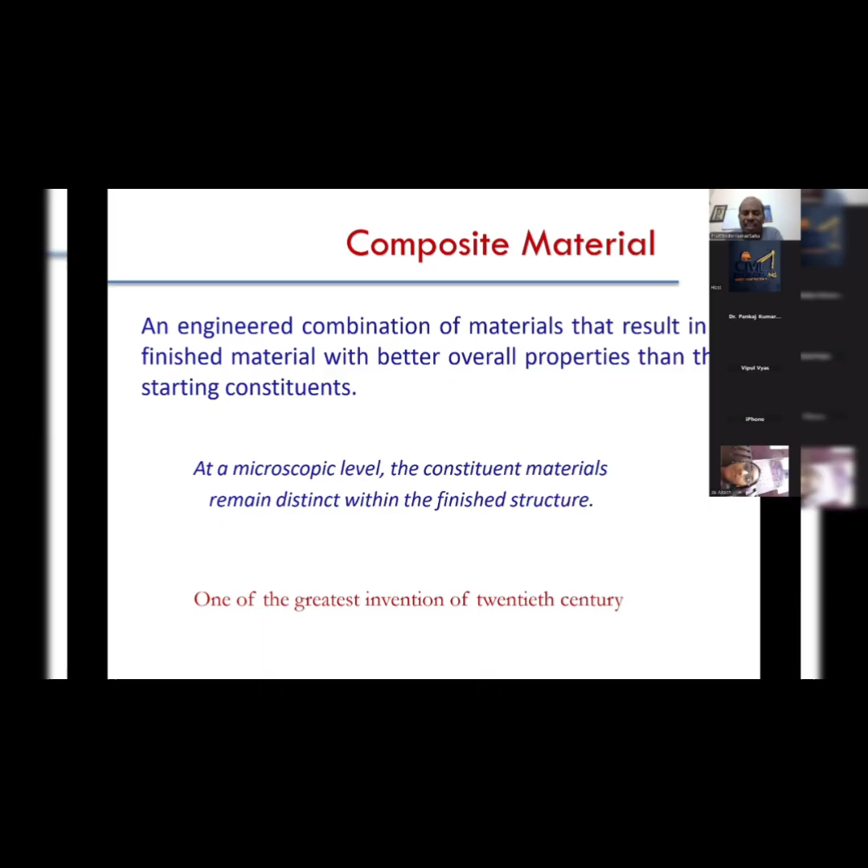In fact, this is one of the greatest inventions of the 20th century. Why am I telling this? The composites were there, but actually the development has taken place recently.

So FRP composites, the history of composite materials started from the Stone Age, where tools and weapons were all made of stone. Then comes natural composites, wood, bamboo. You might have seen wood or bamboo - if you cut it from one direction, cutting is easy, but when cutting in the other direction, it is difficult. This means it has two different strengths in both directions, like a composite. So these are actually composite materials.

There are other composite materials as well - metals, copper, bronze, iron, aluminum, then polymers, ceramics, composites. One commonly used rural material, straw reinforced clay bricks, is also a composite material. Then comes iron for reinforcement of masonry. Reinforced cement concrete is a composite material where the normal cement concrete acts as the matrix and the reinforcement acts as the fiber. In fact, nowadays even fiber reinforcements have come up.

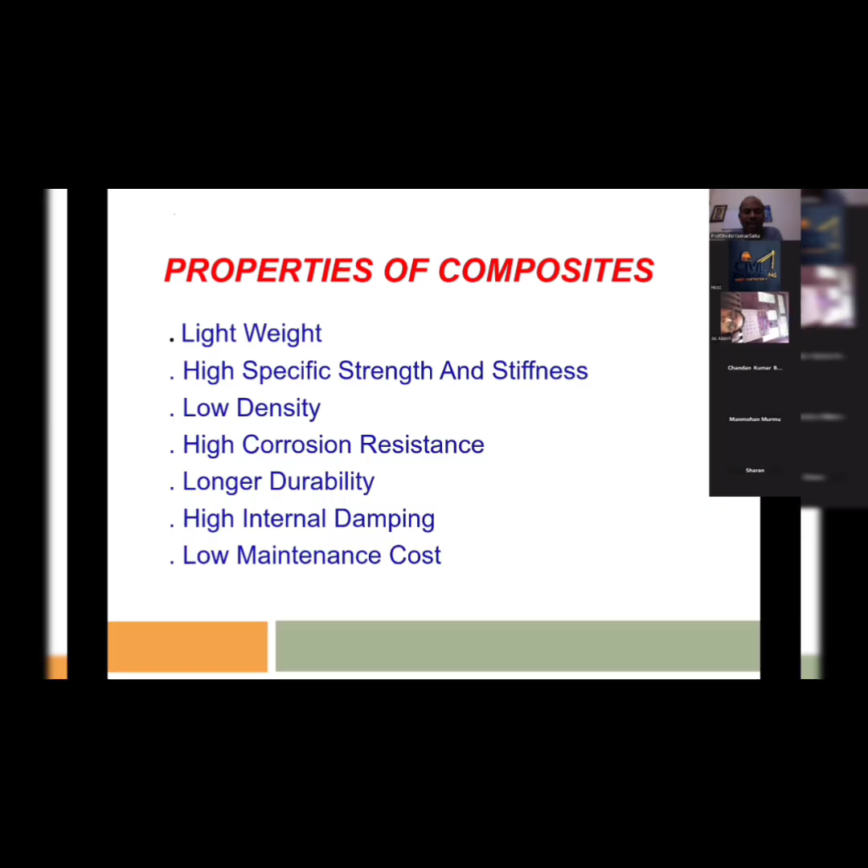Composites have lightweight and high specific strength and stiffness. Specific strength means strength per unit weight—its strength is not high, but specific strength is high. Specific stiffness is high, density is low, corrosion resistance is high, durability is longer, internal damping is high, and maintenance cost is low. These are some of the advantages of composites.

The tensile strength of composites is 100 times greater than that of steel or aluminum. The strength to weight ratio of FRP is 18 times that of steel and 50 times that of concrete. FRP materials are 30 to 40% lighter than aluminum structures.

Besides, most military aircraft are composite actually—aircraft like the F-35, Boeing 787, and Airbus 350 and above. These 350, 380 passenger planes use more than 50% composites in the wings and main body, called the fuselage, and other components, in comparison to Boeing 777 models.

In comparison to Boeing 777, the 787, which recently had an accident, uses a minimum of 50% composite material.

The composite bridge in Oxford, the Avantime passenger car, Kenwood truck, and the award-winning Oracle sailboat are some applications of FRP composites. The F-35 Lightning II, the latest aircraft in the USA, will be the first mass-produced aircraft to integrate structural nano-composites—first composites, then we'll go to nano-composites as well.

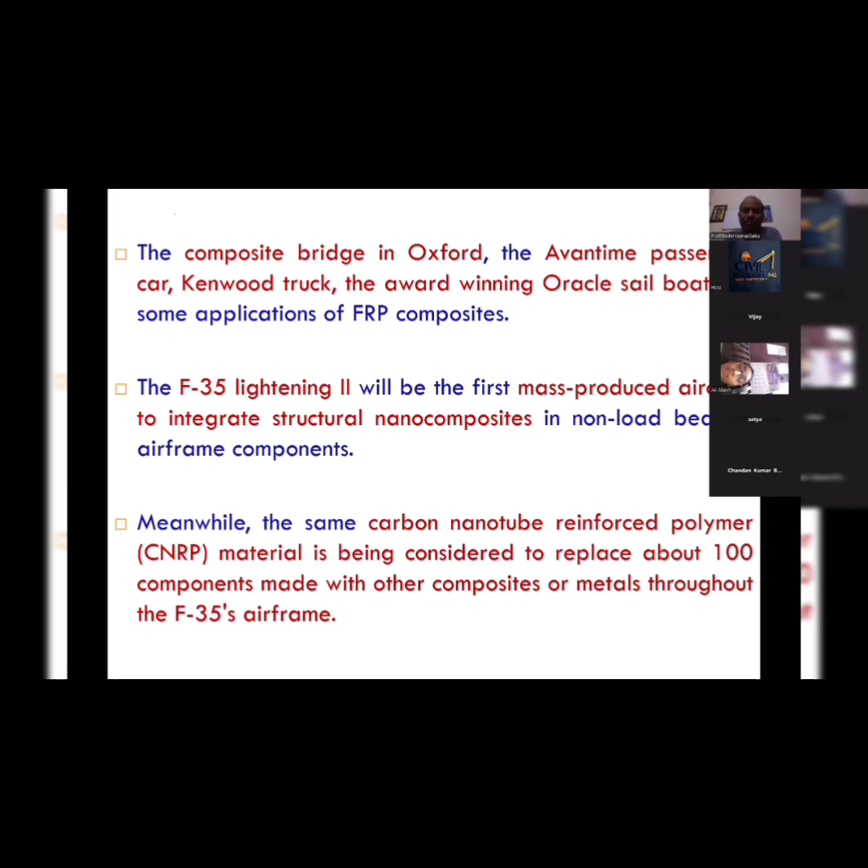Some nanomaterials are put inside the matrix in non-load airframe components. One such nano-composite is the carbon nanotube reinforced material, which is being considered to replace components made with other composites or metals throughout the F-35 airframe, the latest military aircraft.

By comparison, the 777 uses 12% composites and 50% aluminum, while the 787 uses 50% composites. More than 50% composites are being used in the 787 onwards, and in most military aircraft.

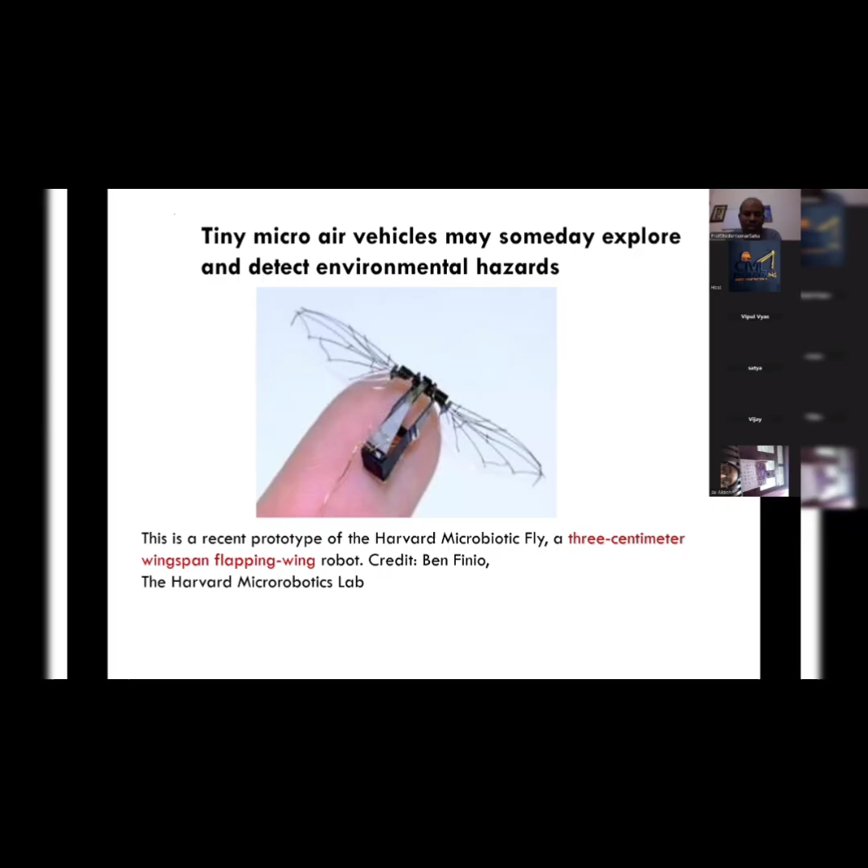Including spying. This is also a teeny micro air vehicle used to detect environmental hazards. This one was developed at Harvard University, a 3 centimeter wingspan flapping wing bot.

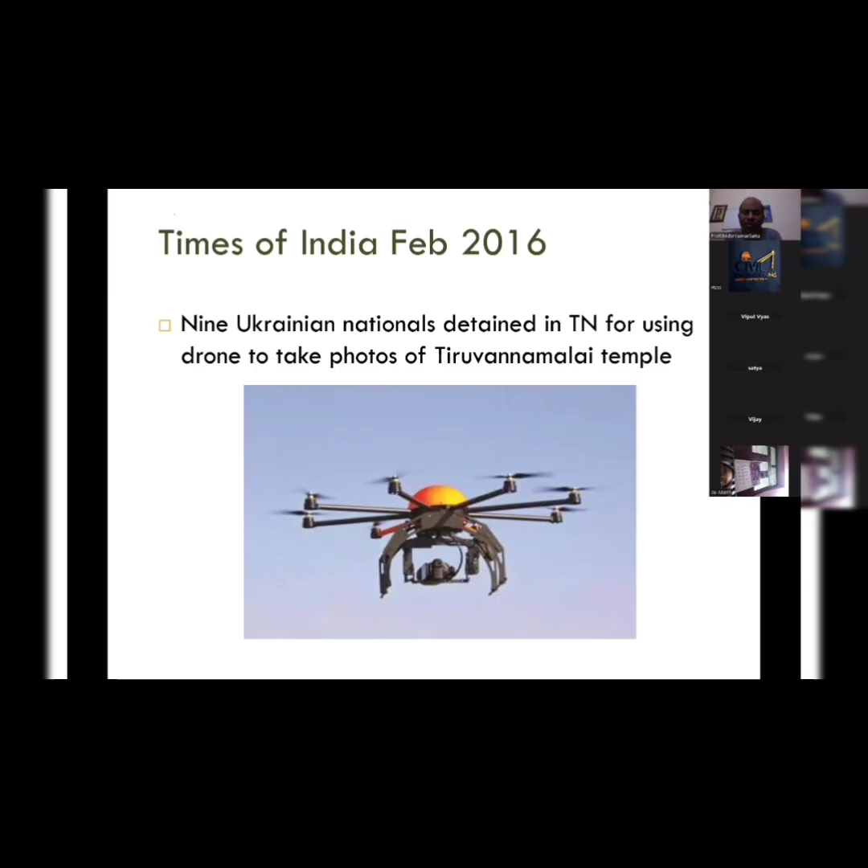These are small drones. Nine Ukraine nationals were detained in Tamil Nadu in 2016 for taking photos of the Tiruvannamalai temple. Now we are seeing a lot even near Jagannath temple. Every fortnight something is coming up with flying drones, and many parts are composite materials. Drones fly at an altitude of 50,000 feet and can monitor the movement of objects as small as a football.

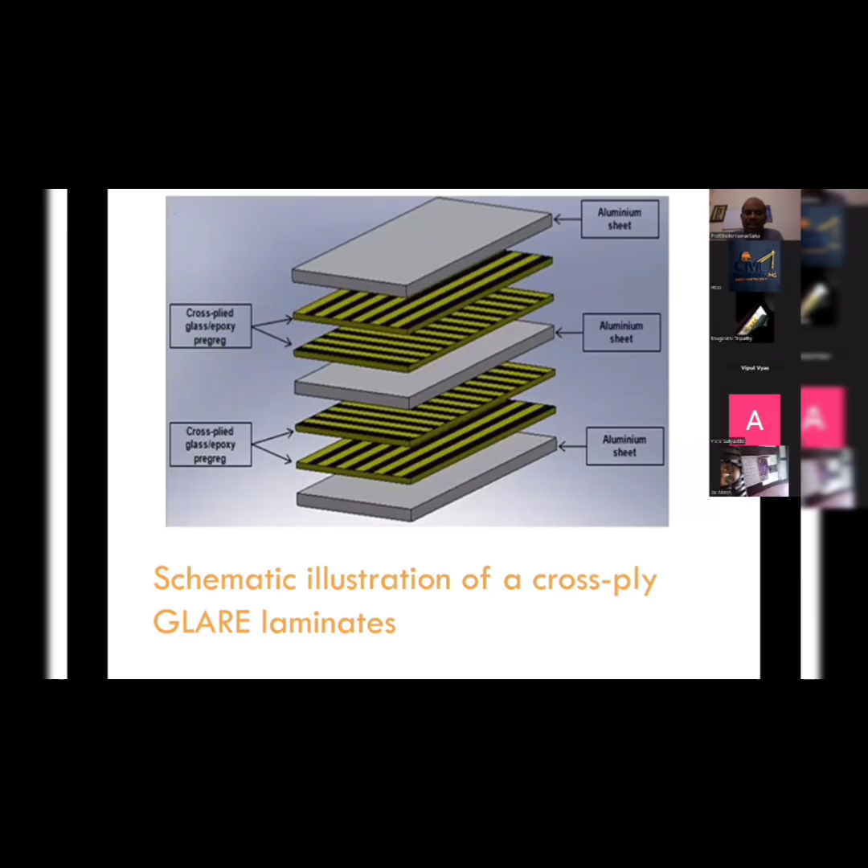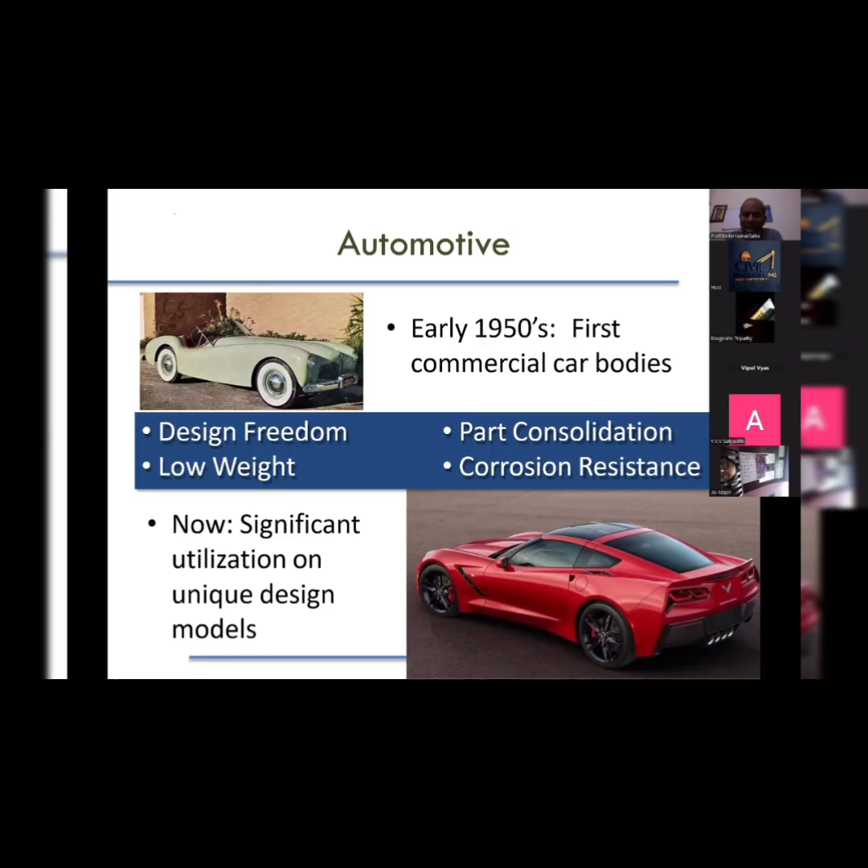So what benefit do we get out of this? You can see a vehicle from the early 1950s, the first commercial car body, and this is one of the latest cars. So we got design freedom, corrosion resistance, low weight, and significant utilization of unique design models can be obtained through innovation by the use of composites.

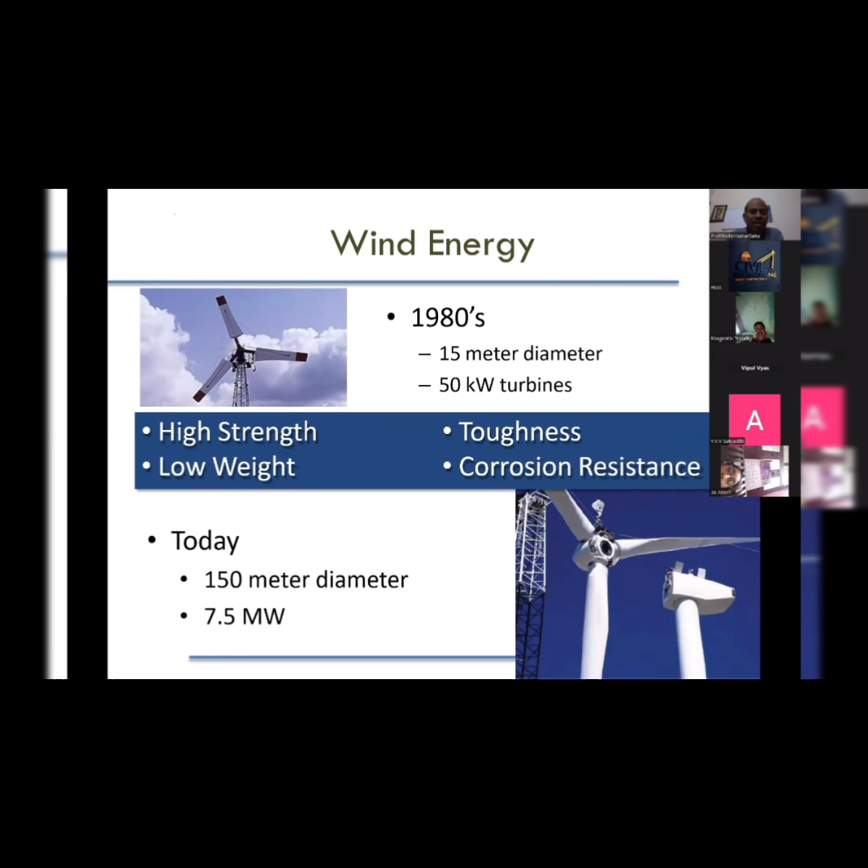This also applies to aerospace. In 1970, the Concorde was 8% composite; now the 787 is 80% composite by volume, 50% by weight.

Besides this, composites are also used for civil engineering member strengthening techniques. We can use it as a composite material directly, or we can use it for strengthening purposes as well. You can see a civil engineering column which had yielded, being wrapped with carbon fiber wrapping to strengthen the column.

We can also give an FRP jacket, or a concrete jacket. These are some of the different methods of column strengthening: you can give a concrete jacket, a steel jacket, or an FRP jacket. The advantage of FRP jackets is that there is no additional load coming onto it, much less load in comparison to a steel jacket or a concrete jacket.

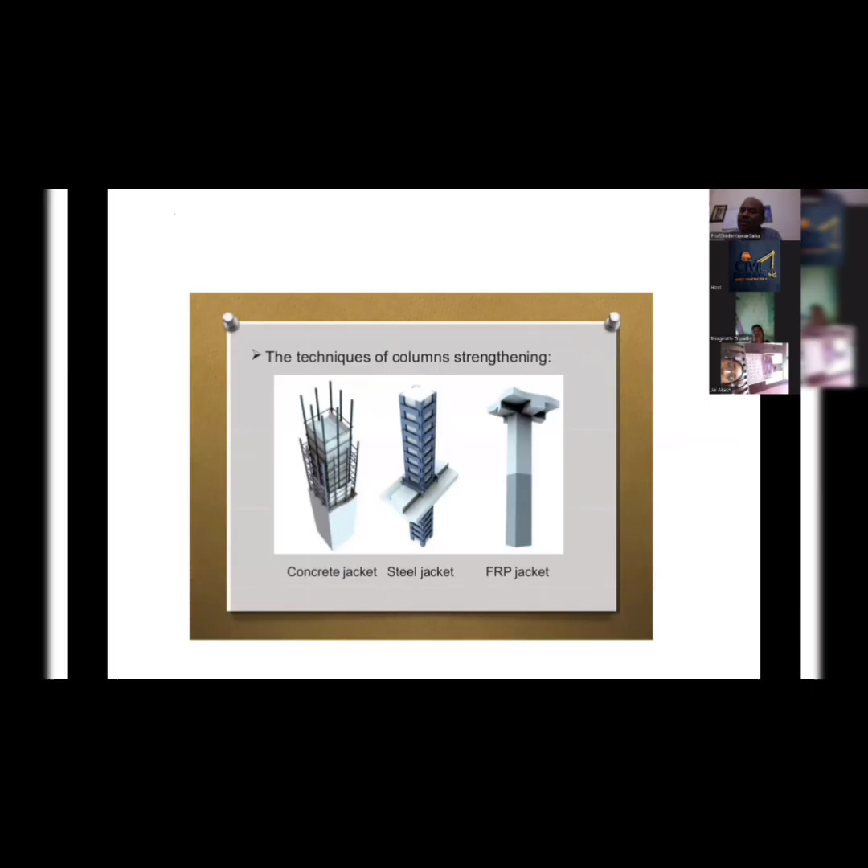So basically the weight of the structure will not change much, with very minimal changes, unlike with concrete and steel. We can also do beam strengthening, with methods like adding an additional layer of new steel, or giving CFRP applications for the same effect.

For bending and for shear. In fact, FRP bars are also coming into the market, just like steel bars FE 415 and FE 500. These are some of the FRP bars: CFRP, GFRP bars, and FRP shear reinforcement.

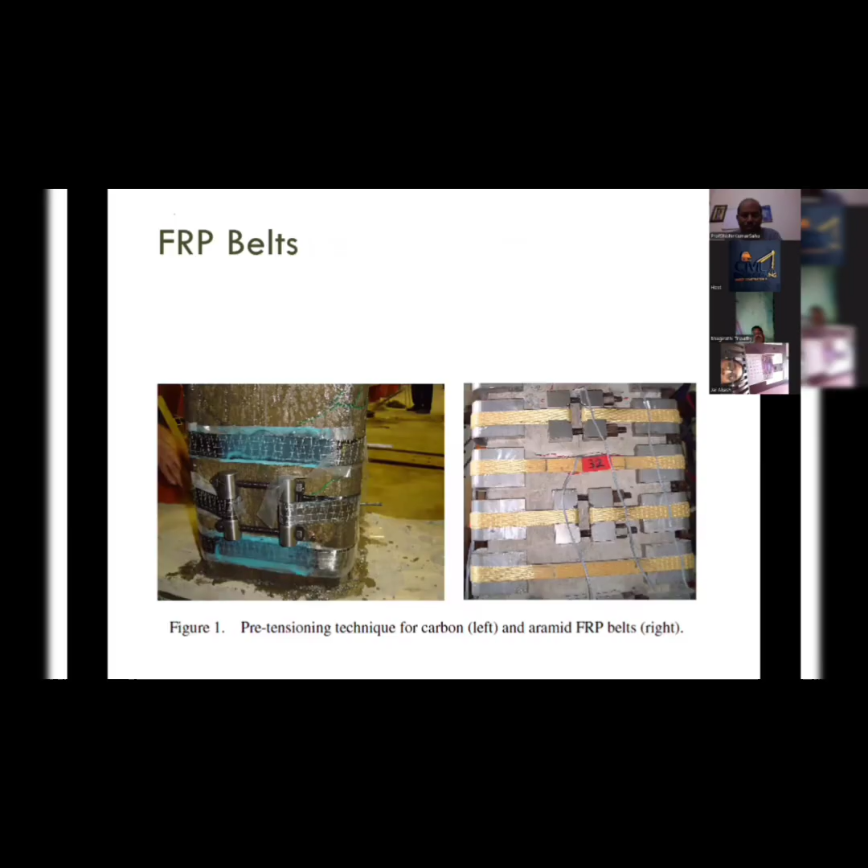FRP belts are being used for strengthening purposes. These are some of the tests we have conducted on beams to strengthen them, using different schemes of FRP - placing at the center, at the bottom, at the top, or using whole wrapping.

These are some uses of composite structures, but today I will focus mostly on composite dynamics. What is the importance of dynamic analysis? Static analysis is done when loads are slowly applied, but when loads are suddenly applied or variable in nature, mass and acceleration effects come into consideration. If a structure is deformed elastically and suddenly released, it vibrates about its equilibrium position.

In fact, when I reached Kharagpur 27 years back for my PhD, I was told to work on vibration. There, I worked in vibration and stability - the same thing I'm working on here, but the difference is what I have done computationally. Over the last 25 years, I've tried to use this for the development of composites and the experimental part. The experimental facility wasn't there in the aerospace department at that time, though some testing facility existed in the mechanical department. Even manufacturing of composites wasn't there in aerospace, and vibration tests were not there either. So all these things I have tried to build over the last 27 years, and I will show you some of what we have developed here - all done in our laboratory.

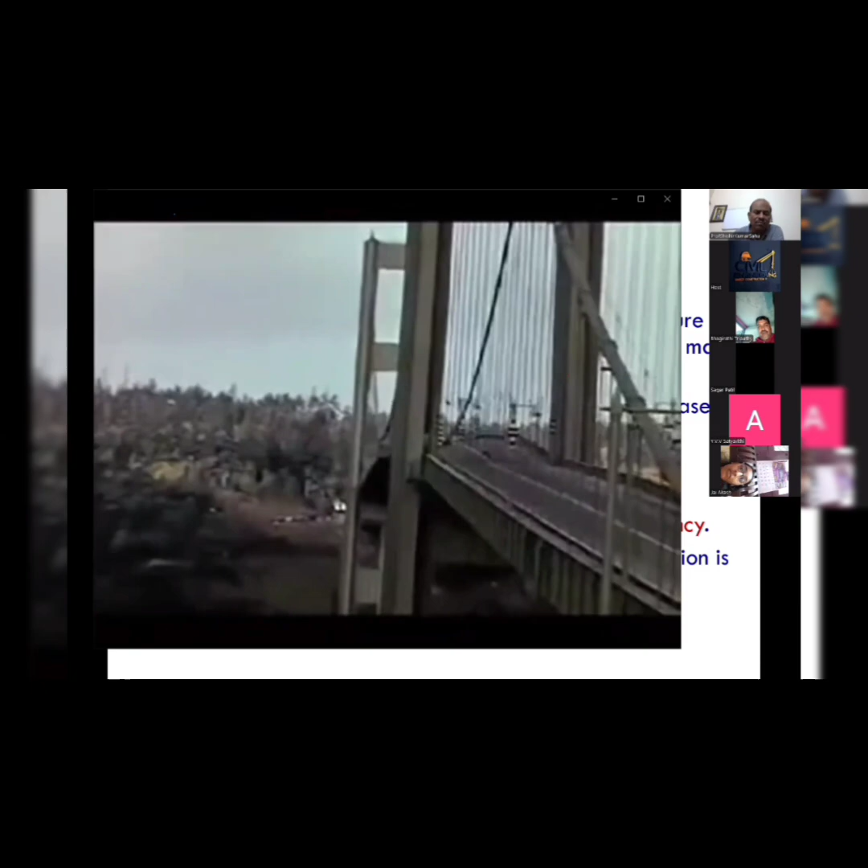Let me show you the importance of vibration. This is a bridge vibrating in the wind. You can see the level of vibration. After a few months, this bridge collapsed. You can see how much vibration can cause havoc.

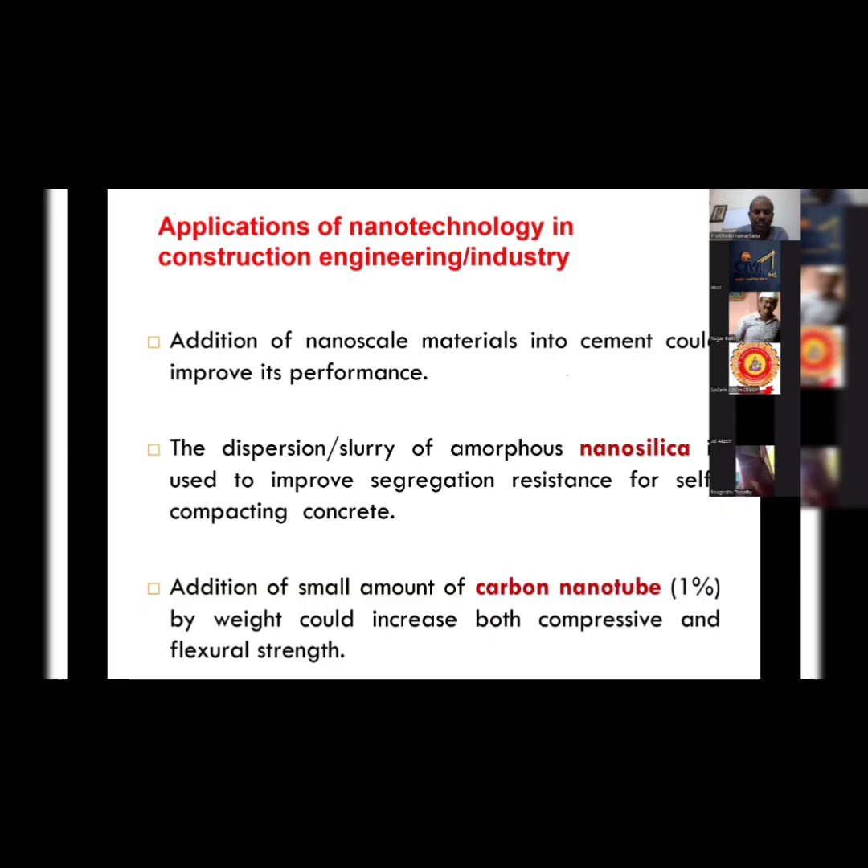So nano and micro electrical mechanical system (MEMS) sensors are used in construction to monitor environmental conditions, materials and structure performance - meaning smart materials. The advantage of these sensors is their dimension, so they could be embedded in the structure during the construction process also.

Smart aggregate, a low-cost piezo ceramic multifunctional device, has been applied to monitor the early age concrete properties such as temperature, relative humidity, and strength development. The sensors are used to monitor corrosion and cracking.

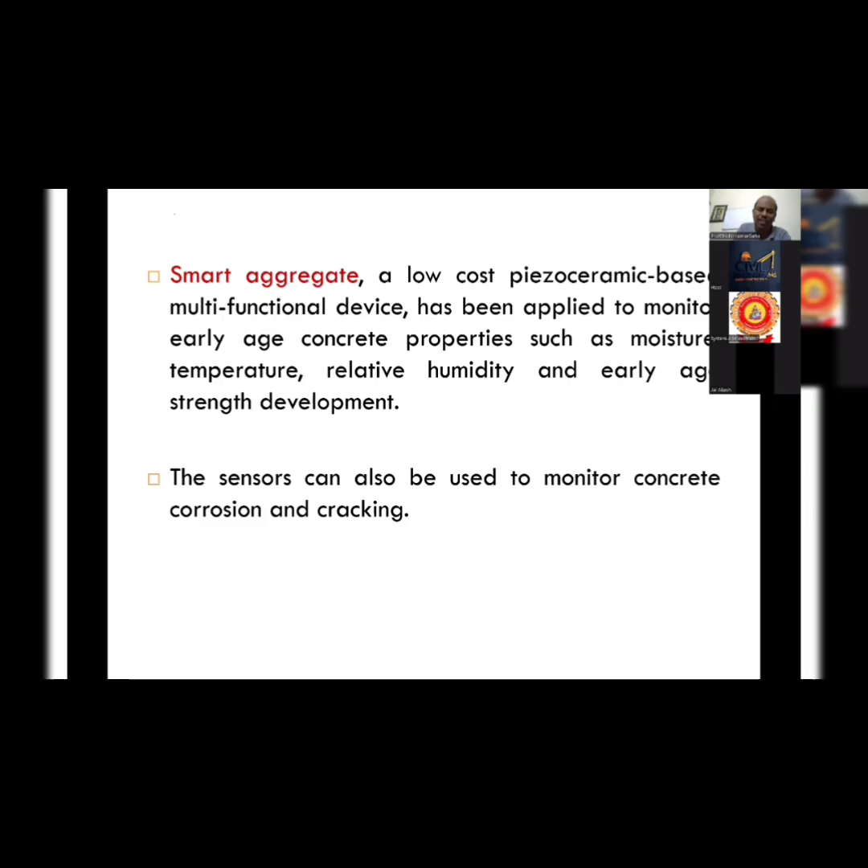Now a lot of discussion is going on about bridge monitoring in the states. The Odisha government is now putting a lot of effort into monitoring of bridges. Because bridges are not easily accessible, less maintenance has been done. One day when it falls down or failure occurs, only then do people become conscious. So sensors can be put so that you can think of when maintenance is required.

One layer might be at 45 degrees, another layer can be minus 45 degrees, another can be 90 degrees, another can be 0 degrees - it can be any degree. This depends upon the force applied - some members are in tension, some in compression, some bending, sometimes torque is acting. So the same configuration may not work; we need to make different configurations based on the requirement.

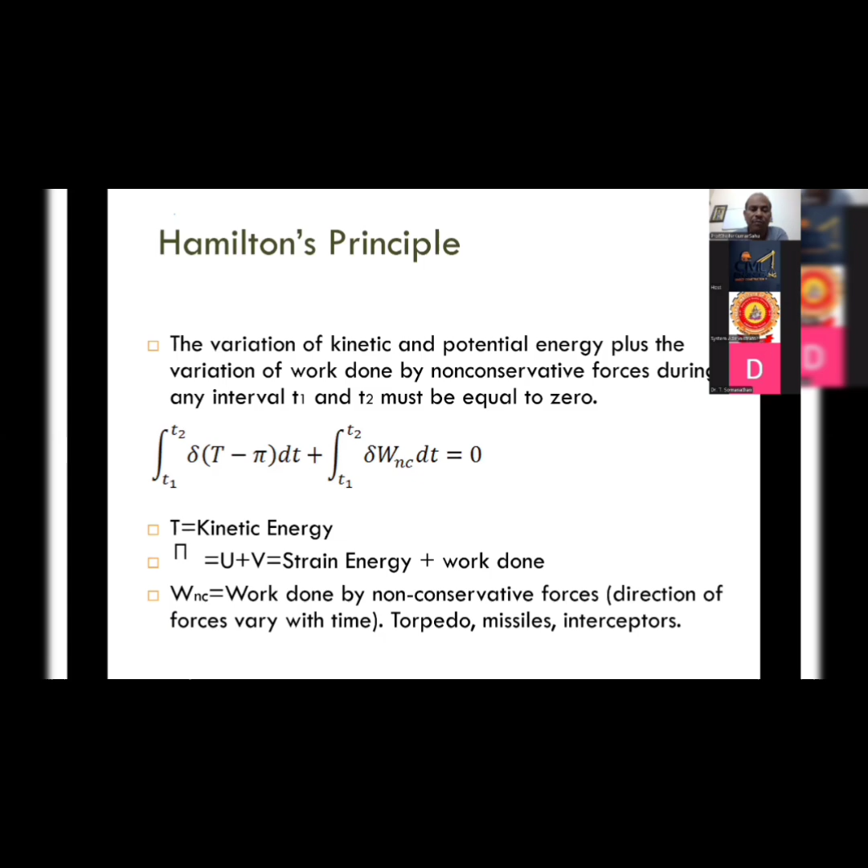When we deal with finite element analysis, mostly finite element analysis has been carried out along with experiments. So this is the Lagrange equation being used for that, where kinetic energy is being considered, and these are the total equations.

M D-double-dot plus C D-dot plus K D is equal to P(T). This is the total equation involving everything. M is the mass matrix, D the displacement, C the damping matrix, K is the stiffness matrix, P is the load. If the load is dynamic, then it's P(T), or else it is just P.

P is the static load. If it is static load, P is equal to K delta. If it is dynamic load, all these things are there. If you ignore damping, C will not be there. So like that, one is there.

Free vibration equation: Ke minus M omega is equal to 0. Buckling problem: Ke minus PCR Kg is equal to 0, or this is called dynamic stability, meaning it is subjected to a dynamic load.

Dynamic load means a building is standing, wind is blowing. Now it is 10 km per hour. During storm, it will be cyclone, it will be 100 km per hour. Every half an hour, the speed is changing. That's dynamic stability. So either the building is standing and the load is coming, or the aircraft is going, the load is changing. Whenever the load changes with time, it's called dynamic load.

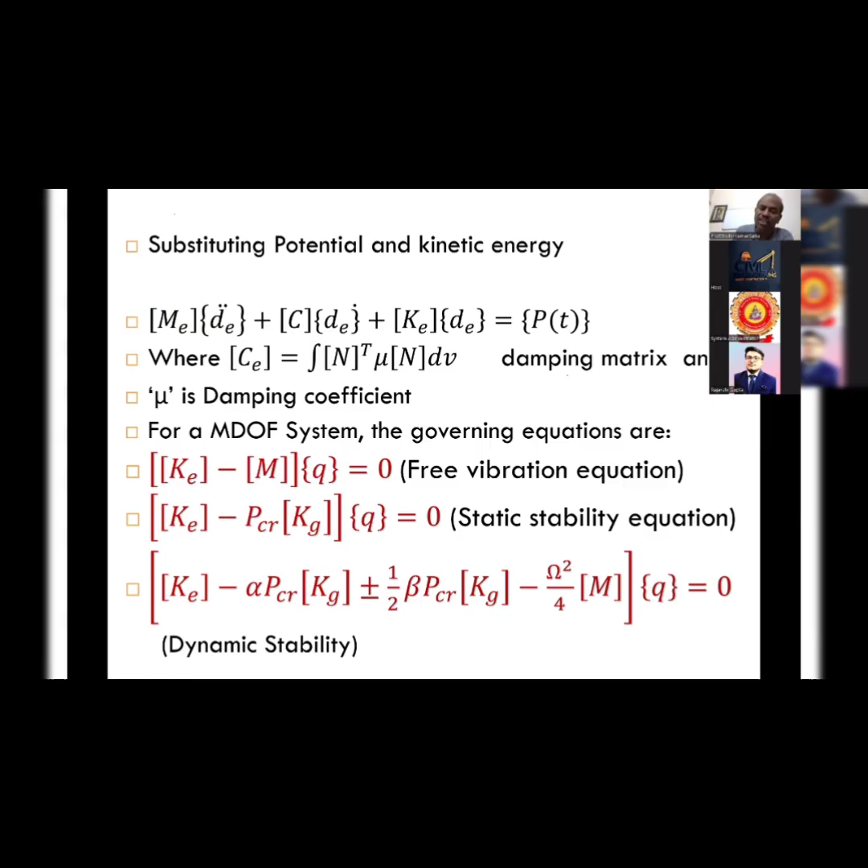In the finite element, we need to take an element. We have taken 4 node, 8 node, 9 node elements - these are the various most common nodes. We have considered an 8 node element with corresponding degrees of freedom U, V, W, theta X, theta Y. U is the horizontal displacement, V is the vertical displacement, W is the bending displacement, theta X and theta Y are the rotations along X and Y directions.

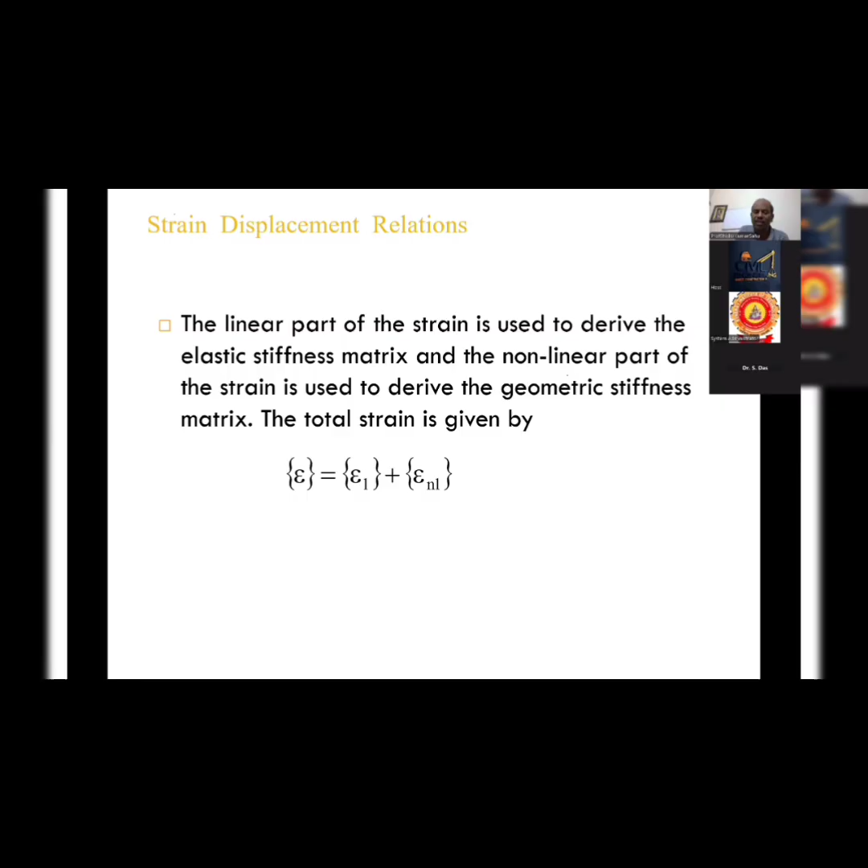This is the strain equation, the strain-displacement relation equation. It can be linear or non-linear, depending on the type of problem being considered. This is the linear displacement equation. Epsilon x is equal to del u by del x, epsilon y is equal to del v by del y, gamma xy is equal to del u by del y plus del v by del x.

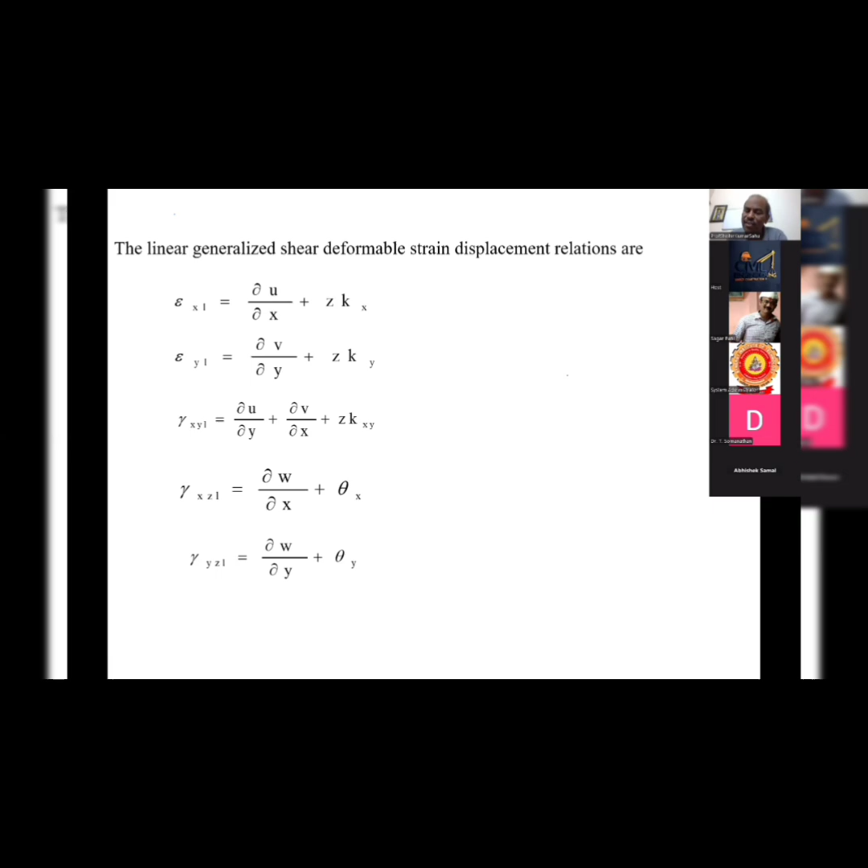In addition to this, the bending components are also included here: Z kappa x, Z kappa y, Z kappa xy. So these are the terms included. The corresponding shear strains are also written, gamma xz and gamma yz. This is valid for a thin plate as well as a thick plate. Composites are usually analyzed using shear deformation theory.

In this way, we can find out the value of the Q's and put it there. This is the stress-strain relationship, where it's called the ABD matrix. In a composite, unlike the isotropic material where it's just a multiple of E and nu, it's more complex.

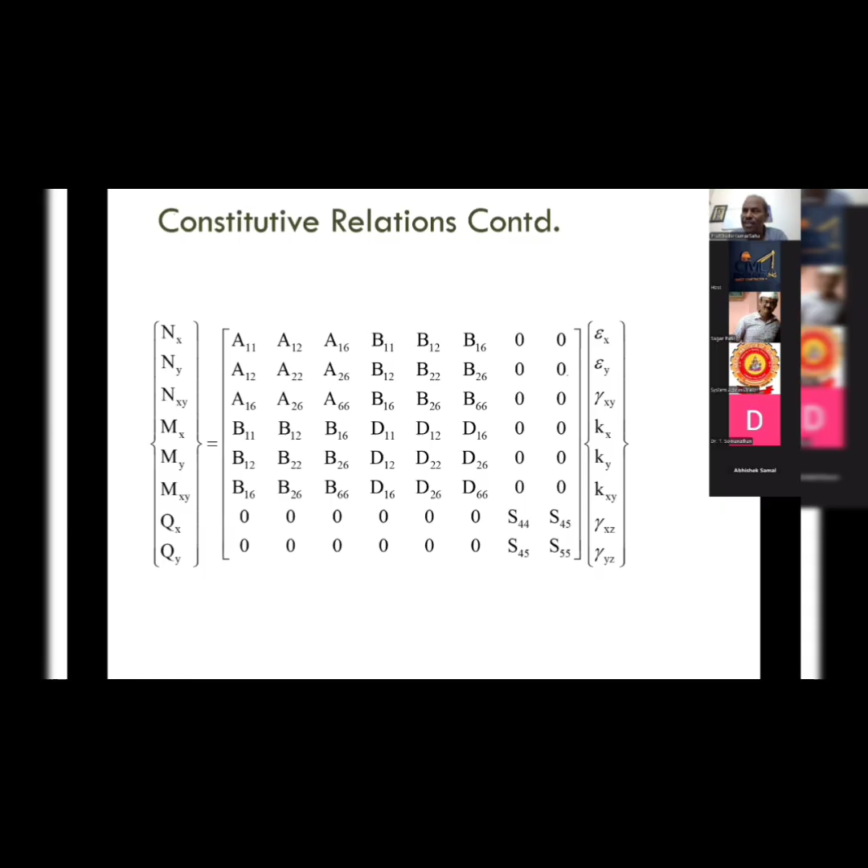Codes are developed in MATLAB environment to compute the free vibration response of industry-driven woven fiber, carbon, glass epoxy composite plates, and double curved shells with area strip delamination exposed to hygrothermal environment. We have done it for plate, for shell, for glass fiber, for carbon fiber, for strip delamination, and for normal temperature as well as hygrothermal temperature. The formulation can handle any geometry, including delamination, material, and general distribution of temperature and moisture. For modeling of delamination, a multi-point constraint algorithm is incorporated in the finite element code.

Then the experimental program - this you can visualize better, how we conduct experiments in our laboratory. So this is glass fiber or carbon fiber - it can be any fiber. We use epoxy and hardener, then polyvinyl alcohol as a releasing agent, and we do the hand layup method.

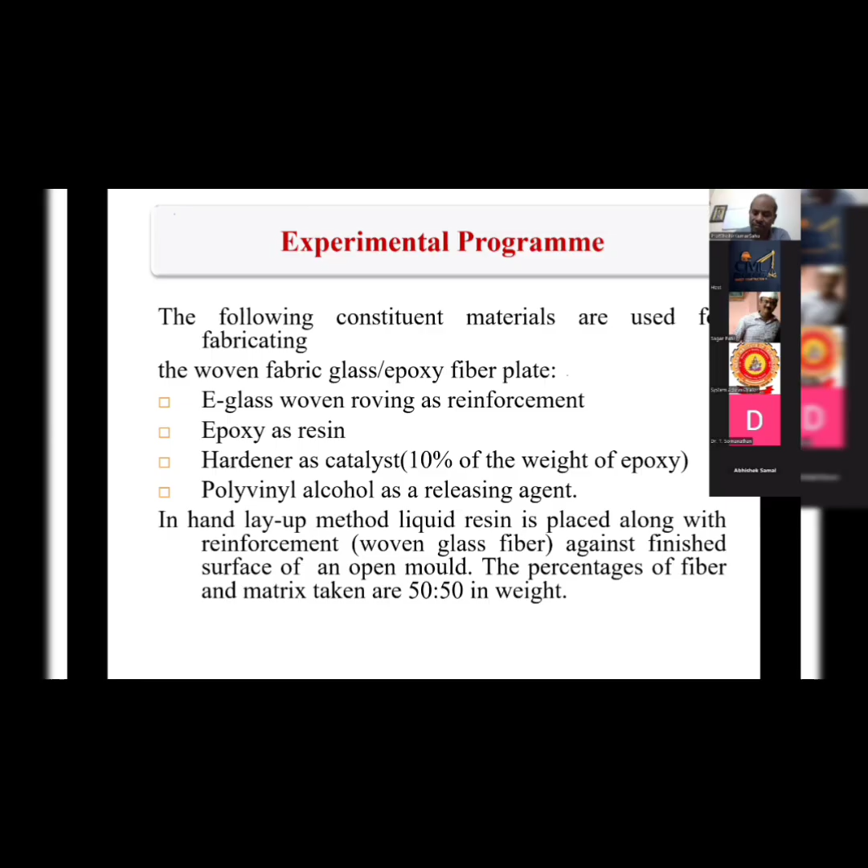This is how it looks like. These are glass fibers. First we put a plastic, then we apply the woven roving glass fiber or carbon fiber, then we put one layer of fiber, then epoxy, one layer of fiber, then epoxy. As many layers as you like, you can do that.

Then we are releasing. The top or bottom one is the releasing sheet. Teflon film is used for delamination purpose. These are Teflon tapes used for artificial delamination in composite.

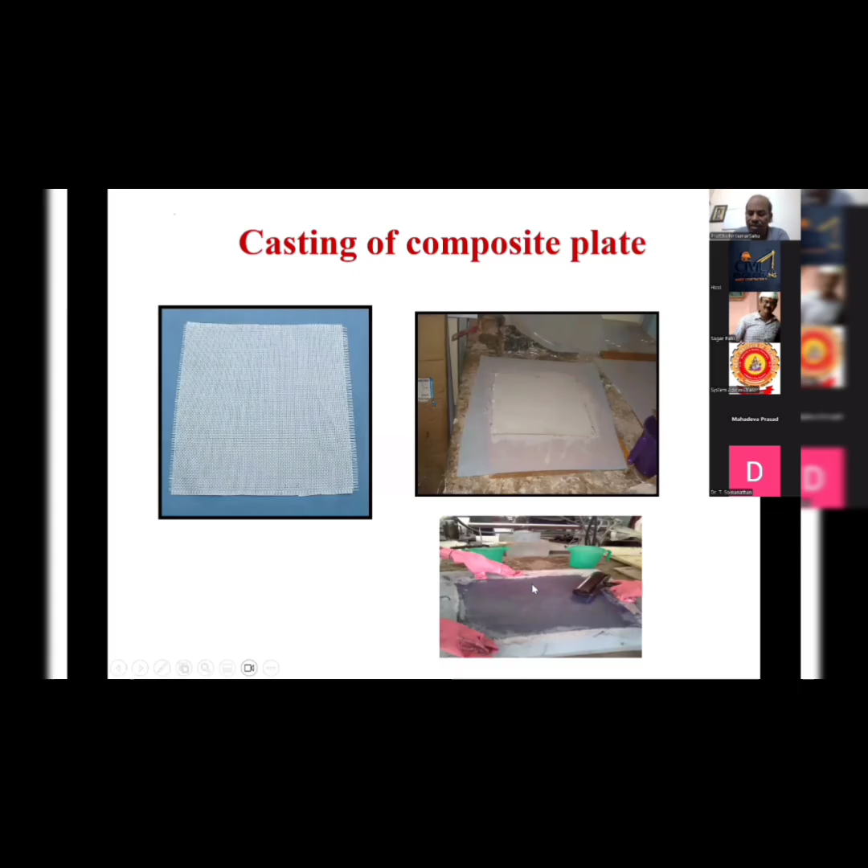These are the plates look like. So this is the plate, this is glass fiber, this is carbon fiber at the bottom. This is artificial delamination, 6.25%, 25%, different percentages of artificial delamination we create with the help of the Teflon tape.

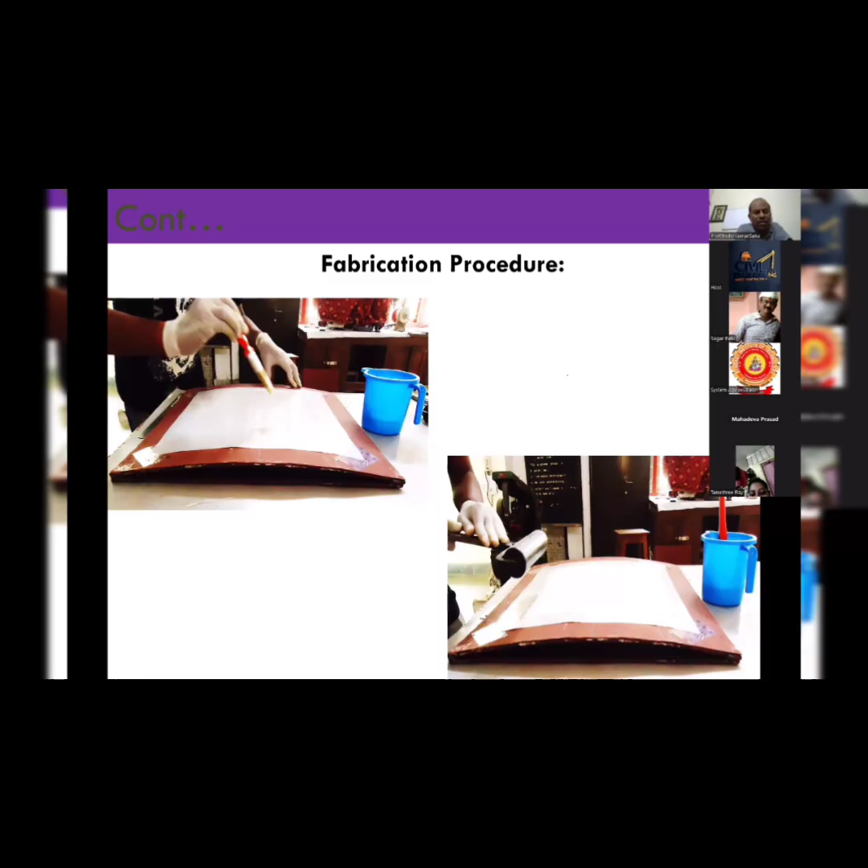Then we have manufactured curved panel specimens. This is how it is being manufactured. So the whole composite fabrication unit is 2,000 rupees. It just needs some consumables and a roller like this, a hand roller.

Initially, I saw it in the metallurgy department. Then in the civil department, we have also started 20 years ago. Casting of fiber metal laminate. Fiber metal laminate is one layer aluminum and fiber, aluminum, fiber - multiple layers can be put into that.

This is CNT, carbon nanotube. These are available in powder form in the market. You can add it to our concrete, you can add it to our matrix here for composite material. So we are working on adding it to our composite matrix and testing for vibration.

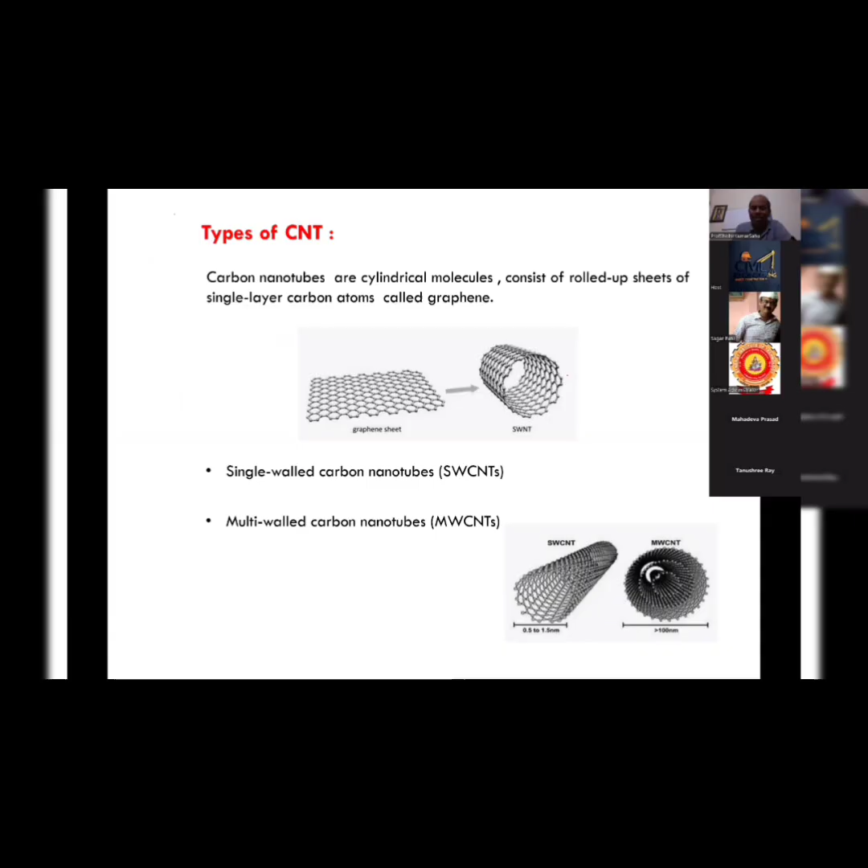Fabrication of CNT reinforced composite material. So this is the first multi-wall CNT. We are using multi-wall CNT plus acetone. Then we do stirring, then sonication is done.

Then it is added with epoxy, preheating, then mixing, then stirring. Then again sonication, goes to vacuum chamber and hardener is added. Then molding is done, composite plate, and then tensile test and vibration sample has been prepared. So right now this test is ongoing.

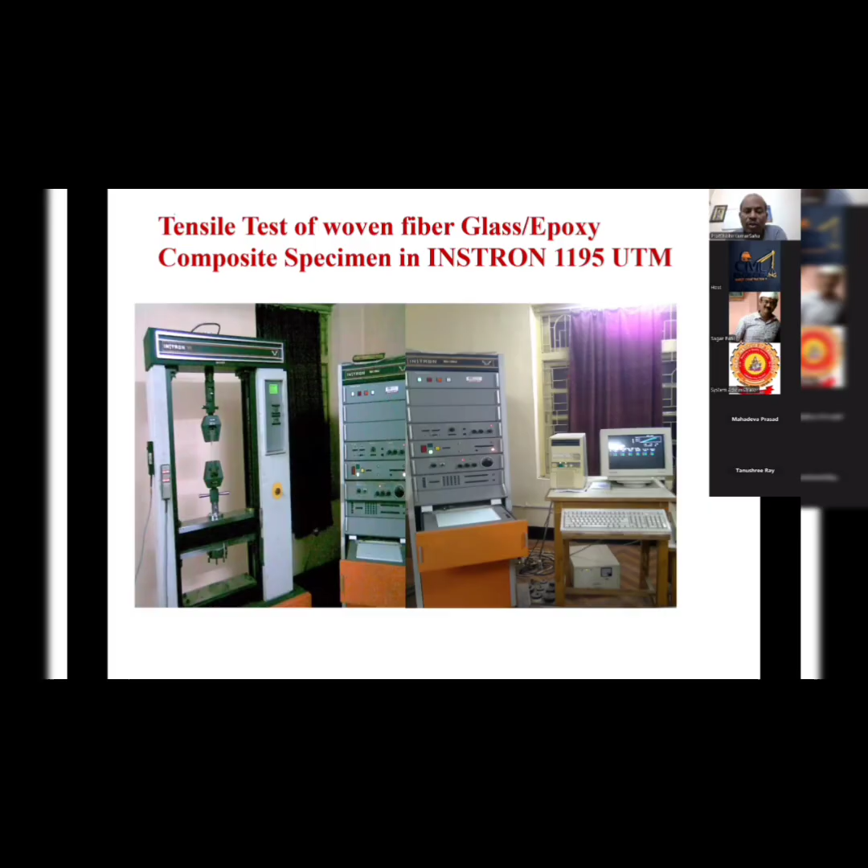What we actually do, once we do the tensile testing, we get the strength of the material, then it is put inside the program, and plate natural frequency we predict from the program, and we test it. The frequency testing is also carried out with the help of an FFT analyzer.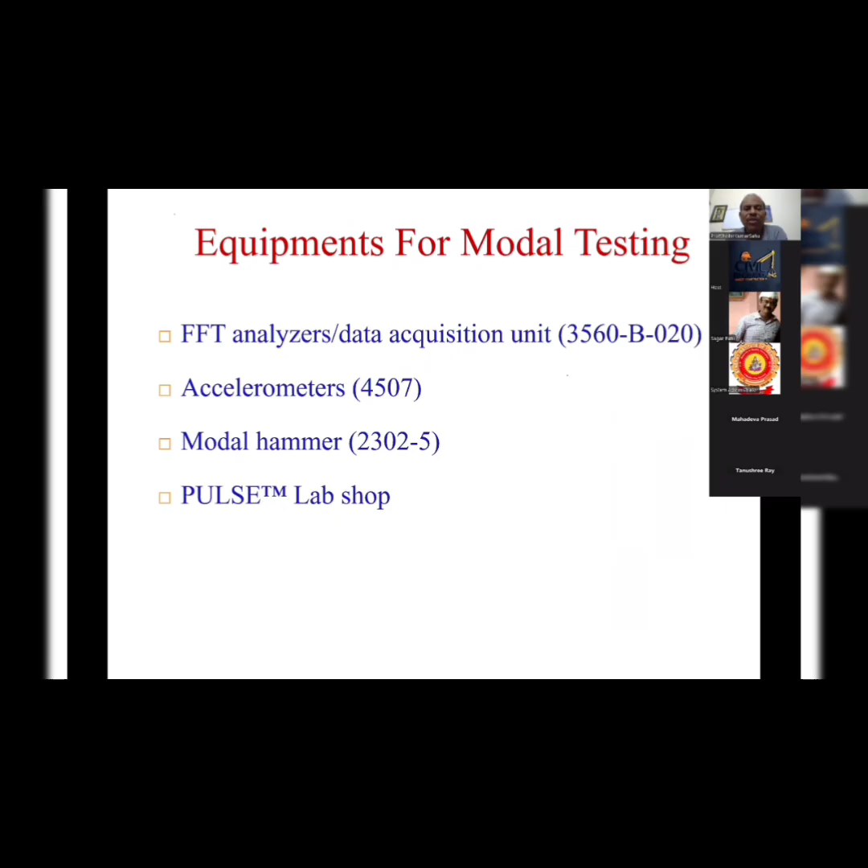These are the tensile testing setup. Then this is the vibration testing. Equipment for modal testing - it's called modal testing. So this is the test setup, this is the vibration test.

So in fact, this is the data acquisition system. This is called the impact hammer. It's a normal hammer, but it's called impact hammer because it's connected with the machine, so the software shows how much load you are giving, it will be measured. We give load to the plate specimens through this impact hammer, the plate will vibrate, and it will be collected through an accelerometer to this data acquisition system.

This data acquisition system is again connected with the laptop. Here the software is there, and the software detects the signal from time domain to frequency domain, from which we get the frequency. So this is the display unit. This whole setup is called the FFT analyzer, used for the vibration test.

This is the modal hammer. This is from a company called Bruel and Kjaer.

Then this is the hygrothermal chamber, this is the temperature bath. We put it at multiple temperatures, 100 degree, 200 degree, 300 degree, 400 degree. Similarly, humidity 0.25%, 0.5%, 0.75%, 1%. So multiple humidity percentages we have applied, and we try to show what is the effect on its natural frequency.

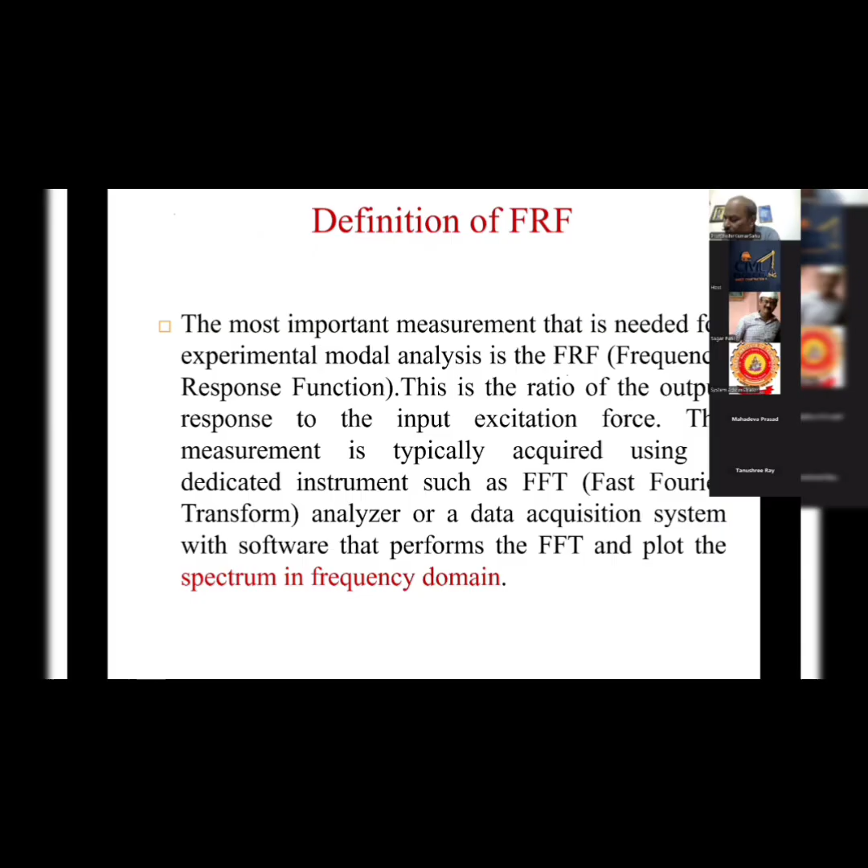Then, what is FRF? FRF is the frequency response function. It is actually when we measure the natural frequency, it shows a frequency response function. So you can see it, how it looks like.

A value close to 1 means it is a very good reading, meaning during the experiment it's giving good data. So if coherence is not good, we reject the reading there itself and repeat the test.

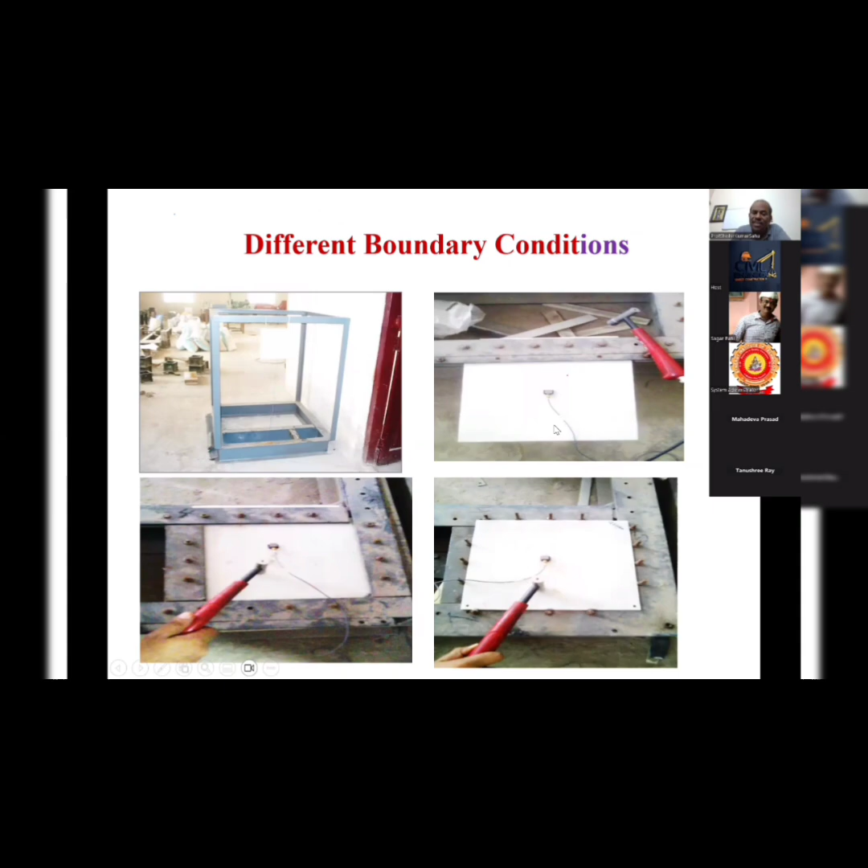This is the free boundary condition, this is another, and this is another important one. Free means the program matches more closely to the free boundary condition. When you give a free boundary condition it matches best, because for every boundary condition there remains some error, but free has the least error.

Now coming to some of the results, free vibration results. First we'll do the convergence study.

Then comparison with previous studies. We compared our finite element results, then our study with experiments. We compared the convergence study, then our results with the previously published results of Crawly, the experimental results of Chakraborty, and the finite element results of Ju et al. Multiple authors' results were compared with ours.

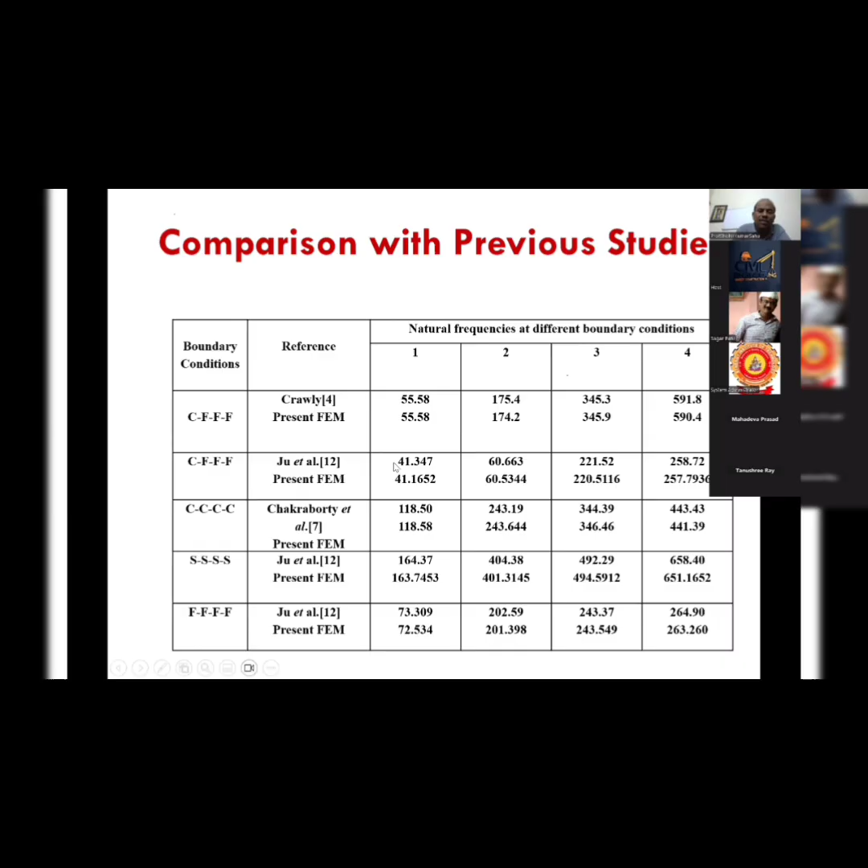Similarly for aspect ratio, which means length by breadth of the plate. For a square plate it is 1, otherwise it can be 0.5, and as you increase the length relative to breadth it becomes 1.5, 2, and so on.

This shows the first, second, third, fourth frequency for experiment and numerical analysis. As you can see, with increase of aspect ratio the frequency increases in this case, but decreases for the first frequency. So these kinds of variations have to be studied for each composite.

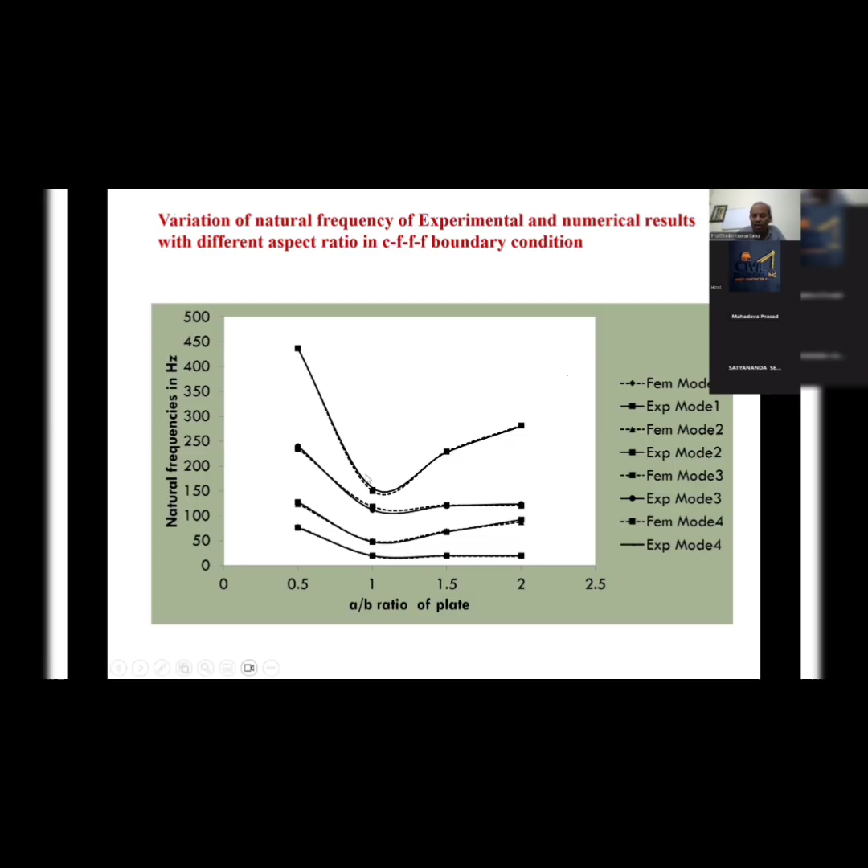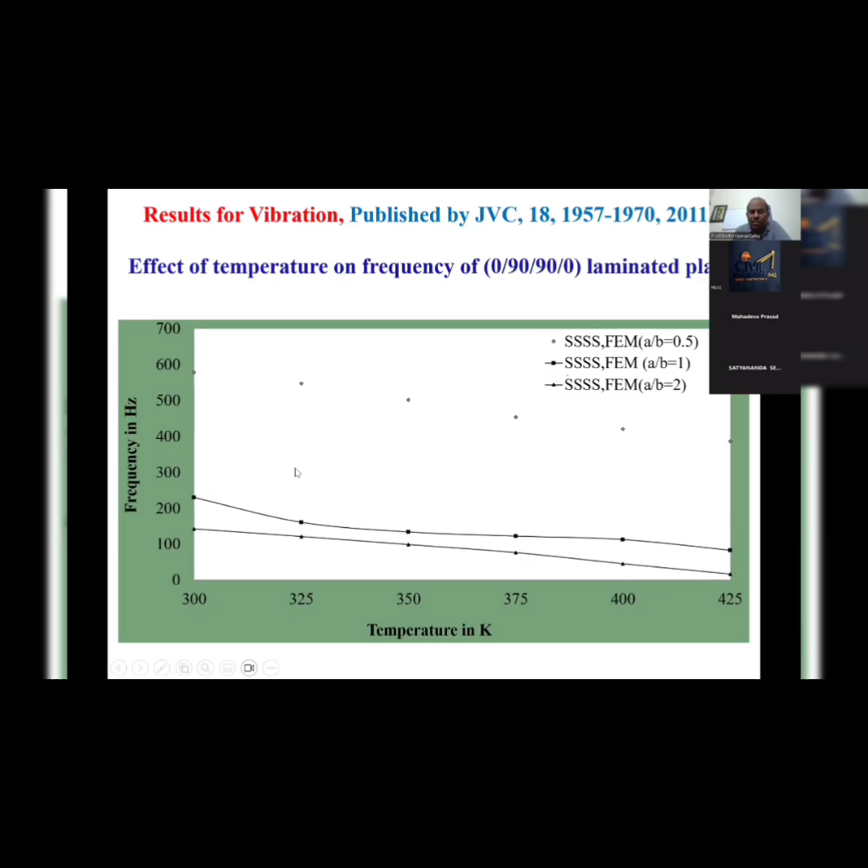Then effect of temperature: as temperature increases, the frequency decreases. This is measured in Kelvin, starting from 300 Kelvin which is normal temperature, then increased by 25, 50, 75, 100, 125. As you can see, the frequency decreases with increase of temperature.

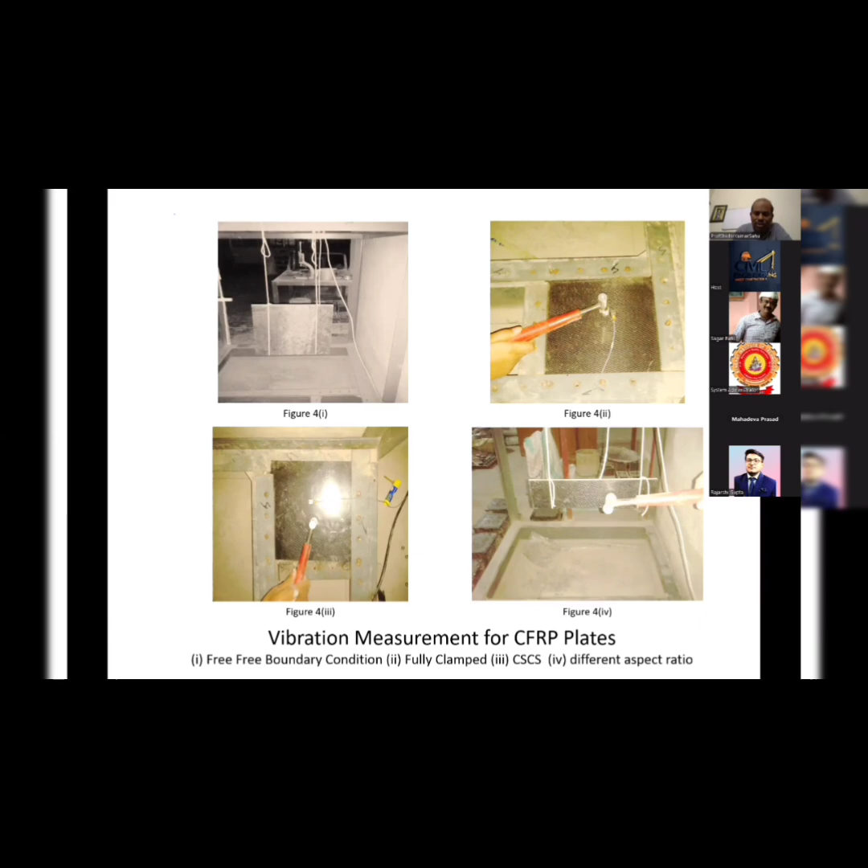The white one looks like glass fiber, and the black one looks like carbon fiber. This is all done with carbon fiber as well. Carbon fibers are costly but real. Our civil engineering applications like roof and wall panels are mostly done with glass fiber, but military aircrafts are done with carbon fibers. A glass fiber sheet of 1 square meter comes around 1,000 to 1,500 rupees, but carbon fiber comes around 5,000-6,000. So carbon fibers are costly, so we have done fewer experiments with it, but we have done it.

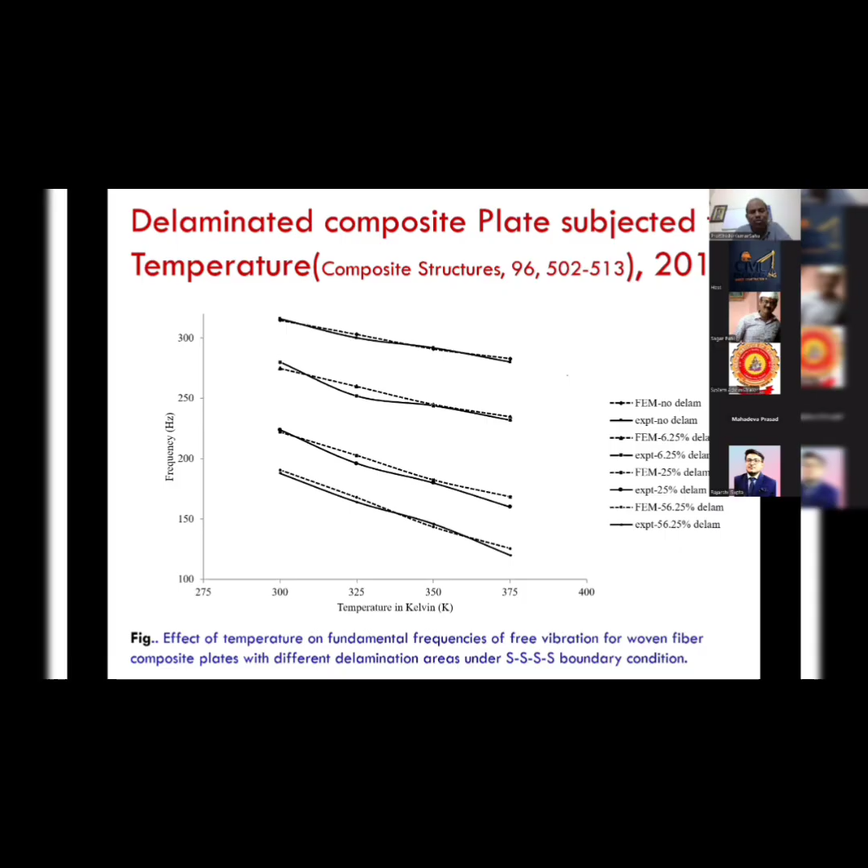Delaminated composite plate subjected to temperature, delamination and temperature both are there. Initially I showed you the effect of temperature. This is a delaminated composite plate with temperature.

This is a plate versus a shell. So this is the plate. Then the FEM and experiment.

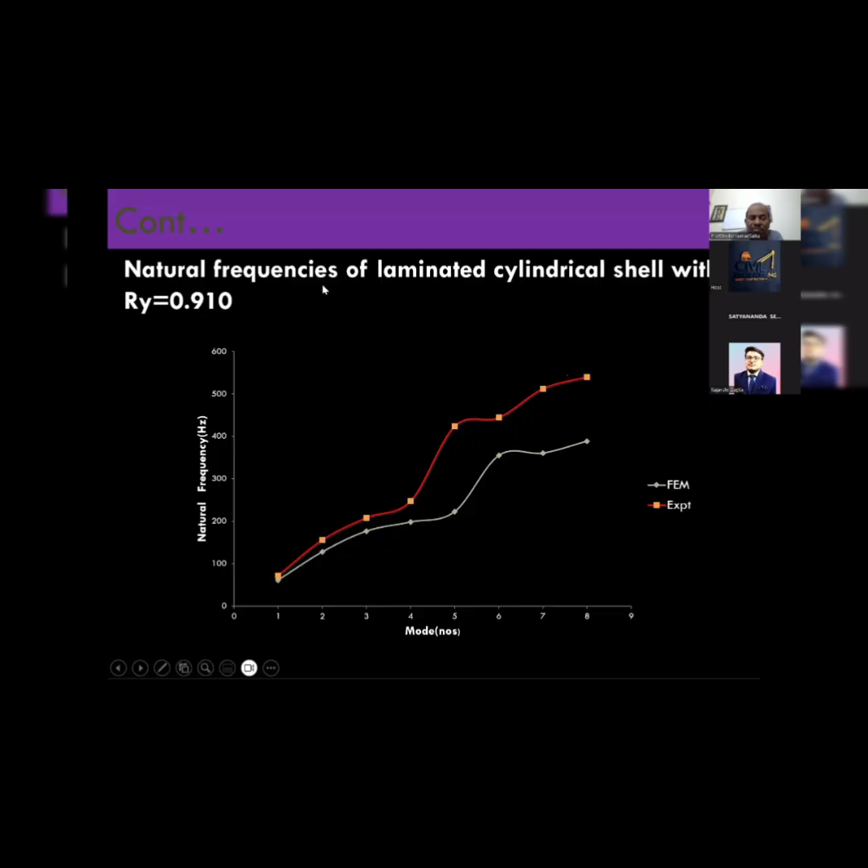Next, compared with a plate - that is the plate - and this is a shell of different curvature. Here I am showing a curvature Ry equal to 0.91. In fact, we have done fabrication for manufacturing of shell specimens. As Ry changes, you can see how the frequency increases.

And these are all mode shapes of shells. You must be knowing there are multiple modes in a structure. When a structure vibrates, there are multiple modes. So this is 1-1, this is 1-2, this is 2-1, this is 2-2. If you take a thin rod and hit it, it will go up and down, up and down. Sometimes one part of it is at the top, the other part is at the bottom, that way. So this is 1-1, just like a deformation shape, but this is 2-1, this is 1-2, and this is 2-2. So the shape of the plate becomes this kind of shape during vibration.

So these are mode shapes at 300 Kelvin, meaning normal temperature. We are trying to show what is the change of mode shapes with respect to the increase in temperature. We have seen this at 400 Kelvin - that was 300 Kelvin, this is 400 Kelvin. So this is the modes of this shell.

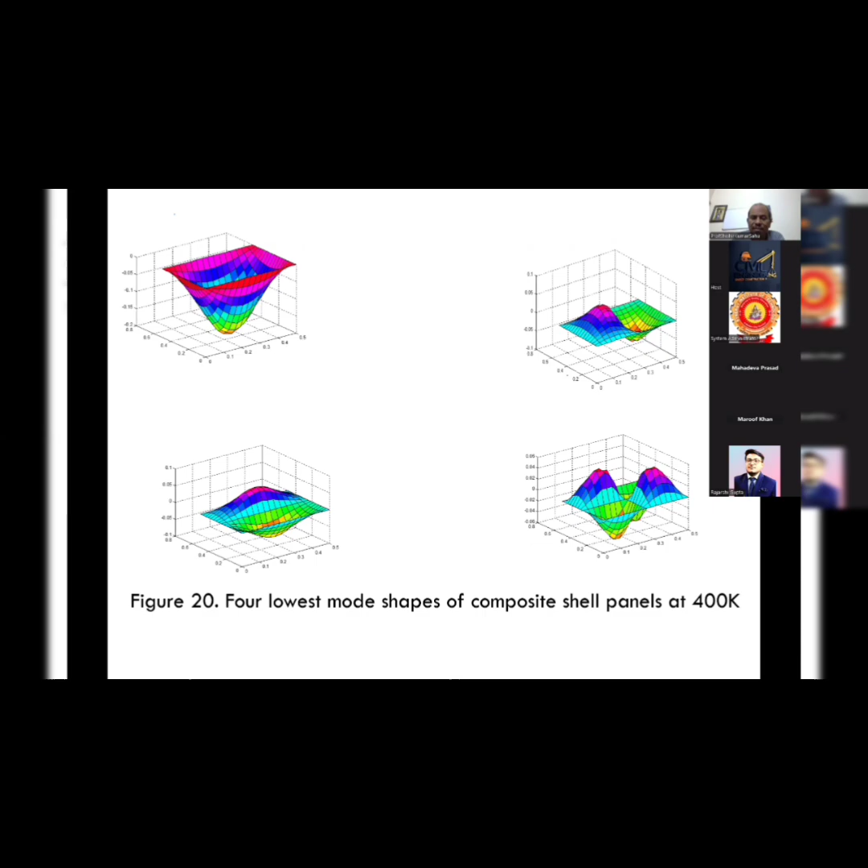Then we have done stability problems, static stability and dynamic stability. Buckling occurs - you must have heard of buckling. Buckling means pi square EI by L square, the buckling load, Euler's buckling load. We try to find out the same thing for a plate, the load for a composite plate.

Here actually nonlinear strains are used for the derivation of the buckling matrix, or the geometric stiffness matrix. This happens when the member or structure's bending strain energy equals the membrane strain energy. This is called Kg, so k minus Kg equals 0 - I showed you this sometime back. Kg is the geometric stiffness matrix and k is the bending stiffness matrix.

When k minus lambda Kg equals 0, lambda is found by putting it into an eigenvalue routine - you must have heard of eigenvalues. These are vibration and buckling problems, which can be solved computationally or even analytically. You need to solve an eigenvalue problem - these are all eigenvalue problems. The frequencies can be found out from A minus lambda B equals 0. So vibration and buckling problems are eigenvalue problems.

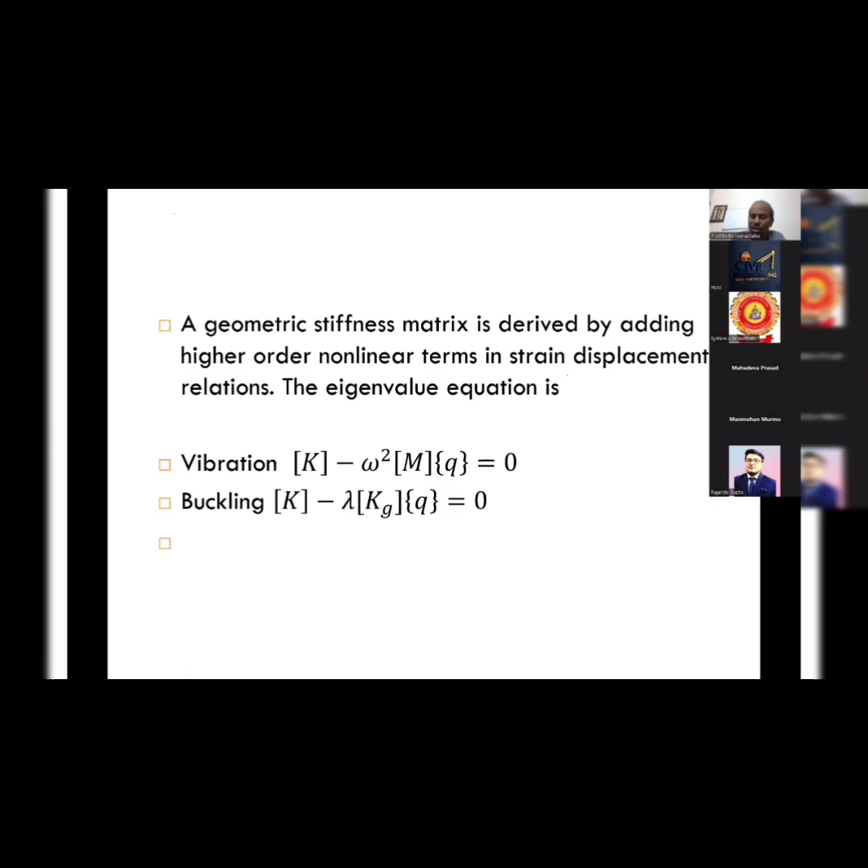Buckling occurs when we put it to an eigenvalue routine and increase the value of lambda gradually. At a certain point, k equals kg. As lambda increases through a loop of values, at a certain point k equals lambda kg, and at that point lambda is equal to the buckling load. That's how we do it.

So this is the kg matrix, depending upon the nonlinear in-plane stresses. When there is only nx, no ny, no nxy, it becomes like a beam column buckling problem.

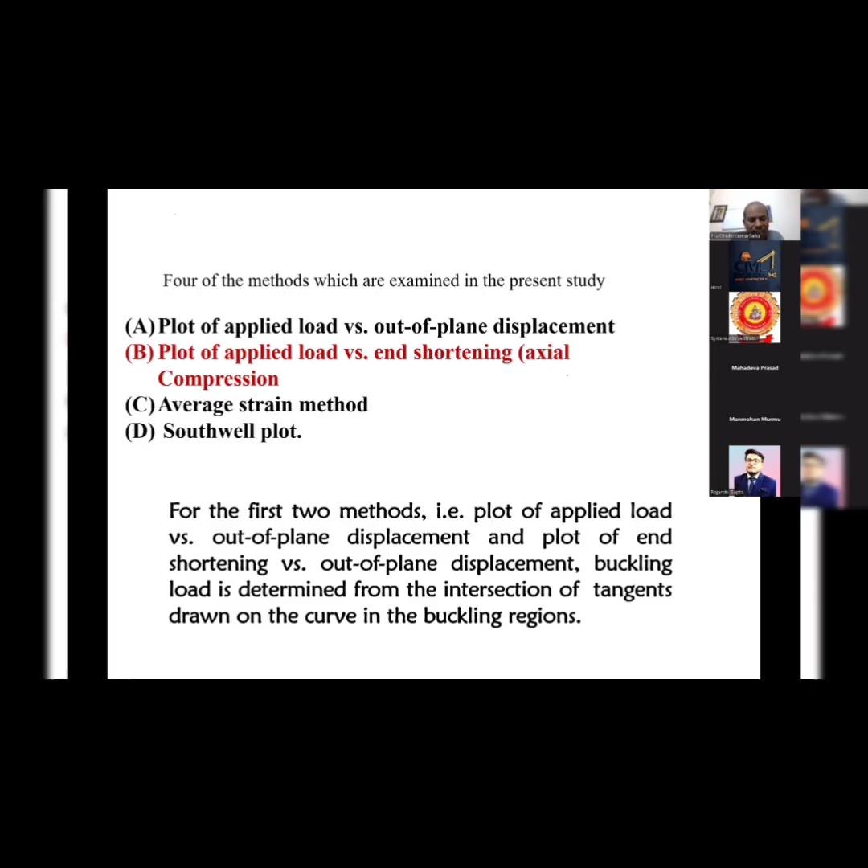Similarly, we apply the same concept to composites, and we have done both experimental and computational work. This is the machine we used for the buckling tests. We put the specimen here, increase the load, and at a certain point it buckles.

So buckling, you might have heard of. If there is a small specimen, it will get crushed. If it is a flat specimen, it will get buckled, taking the shape of a geometrical sine or cosine curve. The shape will buckle, so that's why it's called buckling.

Here is the plate before buckling, and here after buckling. This is where buckling occurs.

We have done it for a few specimens. This is a fatigue testing machine. In fact, this machine is unique in our laboratory since it can do tensile testing, compression testing, and fatigue testing. All types of testing can be done with this single machine.

Previously we used separate setups since this machine wasn't available. Once this machine arrived, we started doing everything with it. It can do bending, buckling, and fatigue testing.

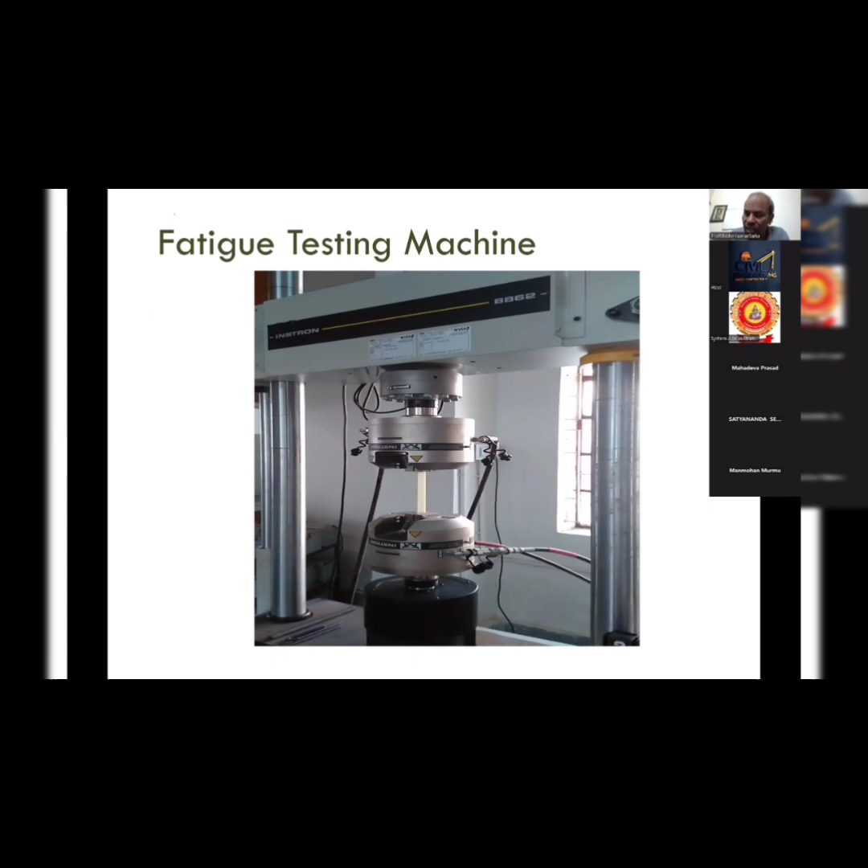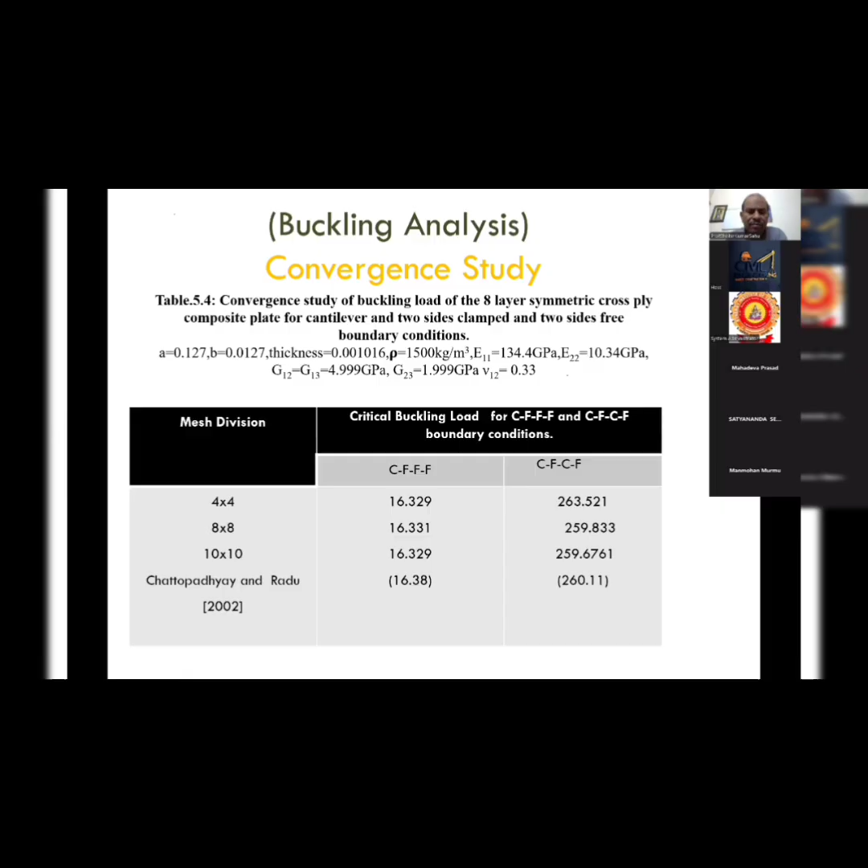Similarly, a convergence study has been carried out for buckling, comparing buckling load results with experimental data. We have done both experimental and numerical studies on buckling.

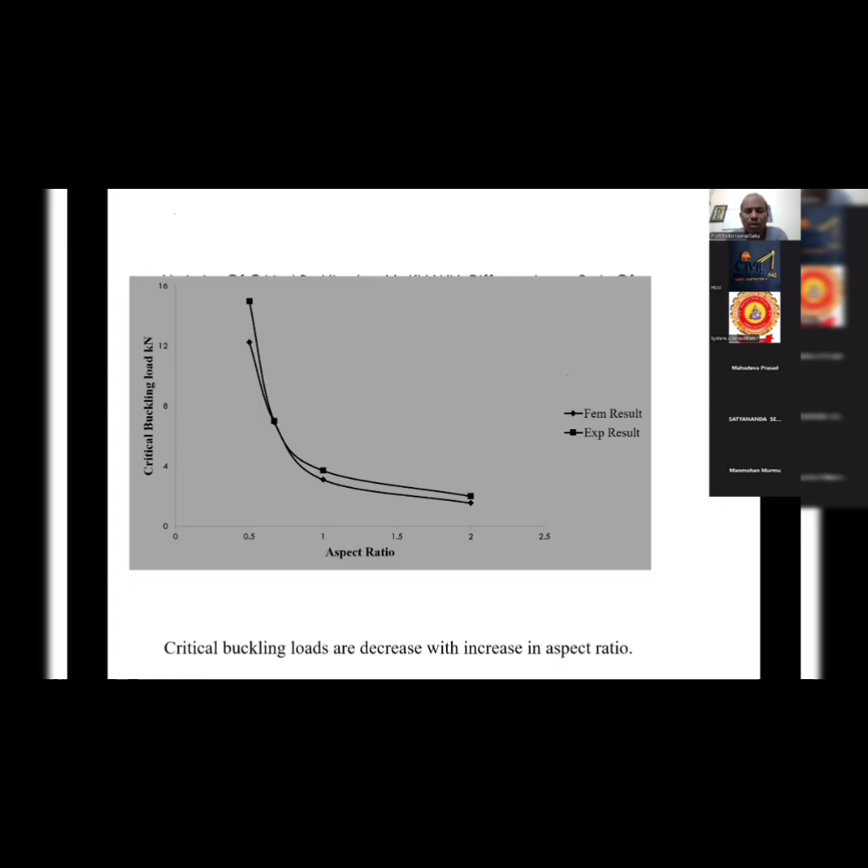Buckling loads for laminated composite plates under clamped-free and simply supported boundary conditions are much lower than under clamped boundary conditions. Clamped boundary condition shows higher frequency and higher buckling load because of the restraint at the edges, leading to higher stiffness. Since it's clamped, everything is restrained—all displacements u, v, w, theta x, theta y—resulting in higher frequency as well as higher buckling load.

So the buckling load can also be found using a dynamic approach. This is one unique dynamic approach. Wherever the static approach cannot be used—for any plate, sometimes when you run an eigenvalue routine it does not yield any result—there we adopt the dynamic approach instead.

It can be done computationally or experimentally; we have tried both. It's essentially a vibration problem with increasing load. At a certain point this is the natural frequency. As we apply loads, the frequency decreases, and if you extend it to the x-axis, wherever it touches, that is the buckling load.

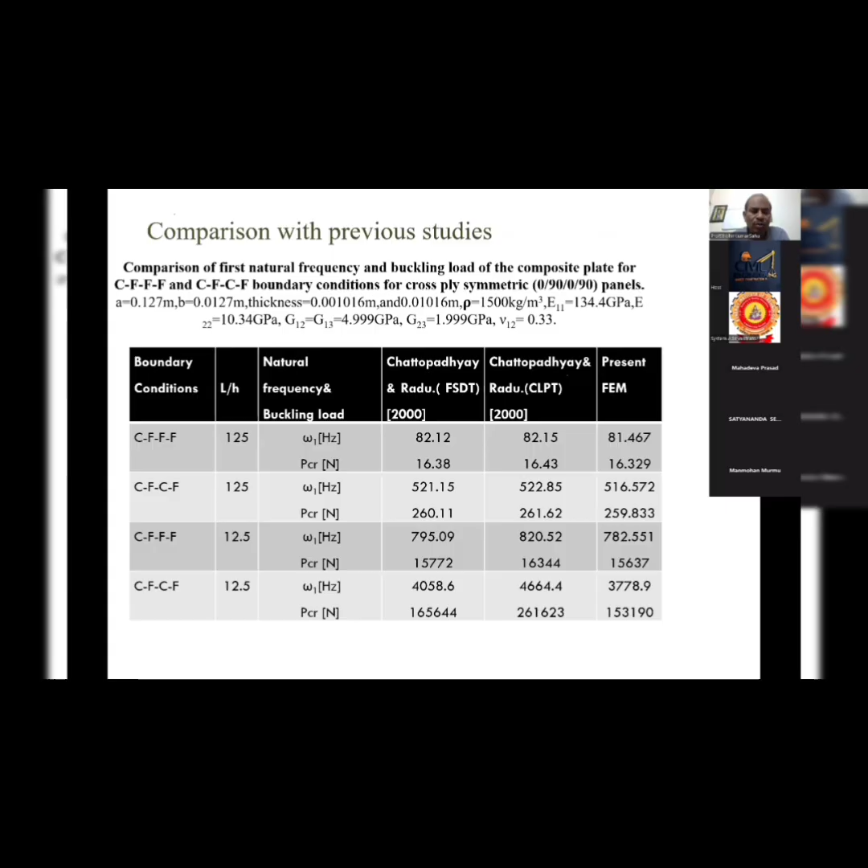Then we have tried dynamic stability analysis, meaning harmonic loading. This is called the Bolotin's approach, which has been conducted, involving a static load factor and a dynamic load factor. It contains both static load and dynamic load.

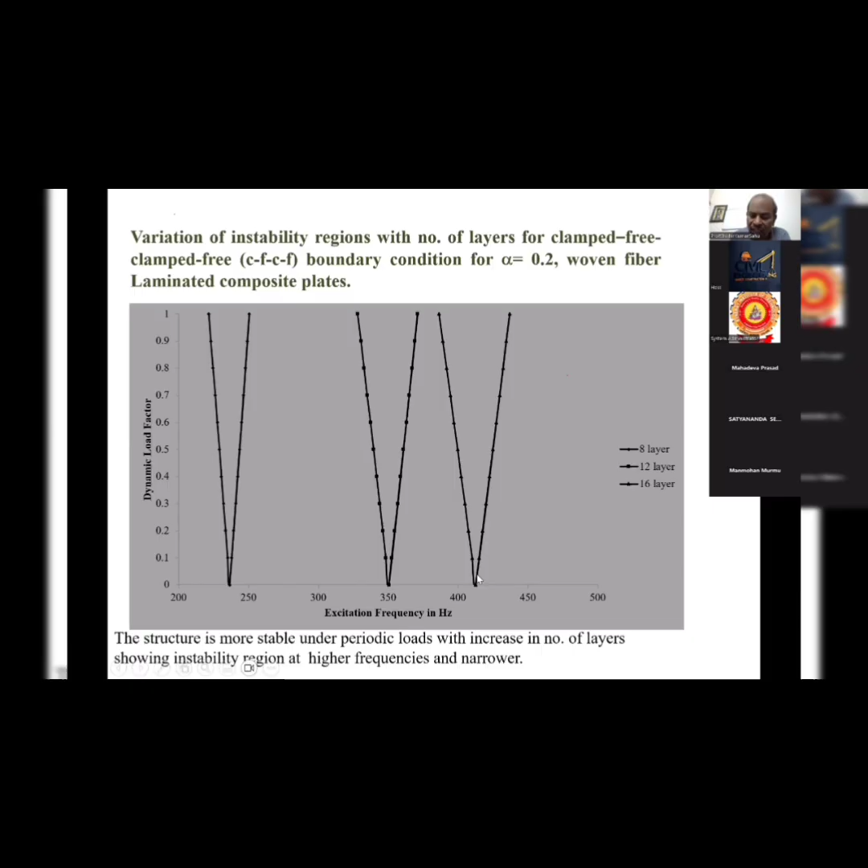So this is the type of curve we encounter—showing the increase of dynamic loads against the excitation frequency. With increase in the number of layers, the plate becomes stiffer and becomes unstable only after a higher frequency, whereas with fewer layers it becomes unstable earlier, at a lower excitation frequency. Similarly, for square plates and different rectangular plates, we study dynamic stability.

Dynamic stability means this is the zone of instability—whatever you see here is the zone of instability. The rest of the portions are stable.

So if you are doing this plate, you forget about this zone. Other zones, there will be resonance in this zone. Other zones are stable. This is clamped, meaning these are the clamped one, which has the highest excitation frequency.

This is the orientation, and again, layer wise.

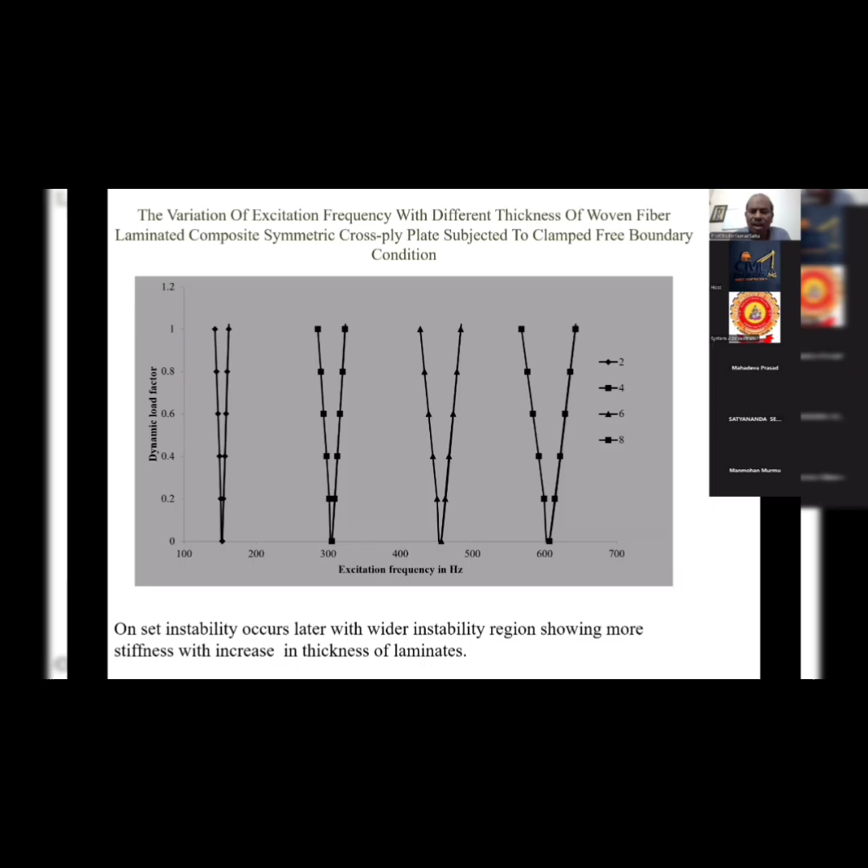So we have done, and are also doing right now, fatigue testing. We have done fatigue testing with CNT carbon nanotube plates, nano alumina plates. We have also done experiments with stiffeners. Stiffener also we have done the experiment. In fact, some faculty from Burla has done all these tests, of stiffener composite plate with stiffener.

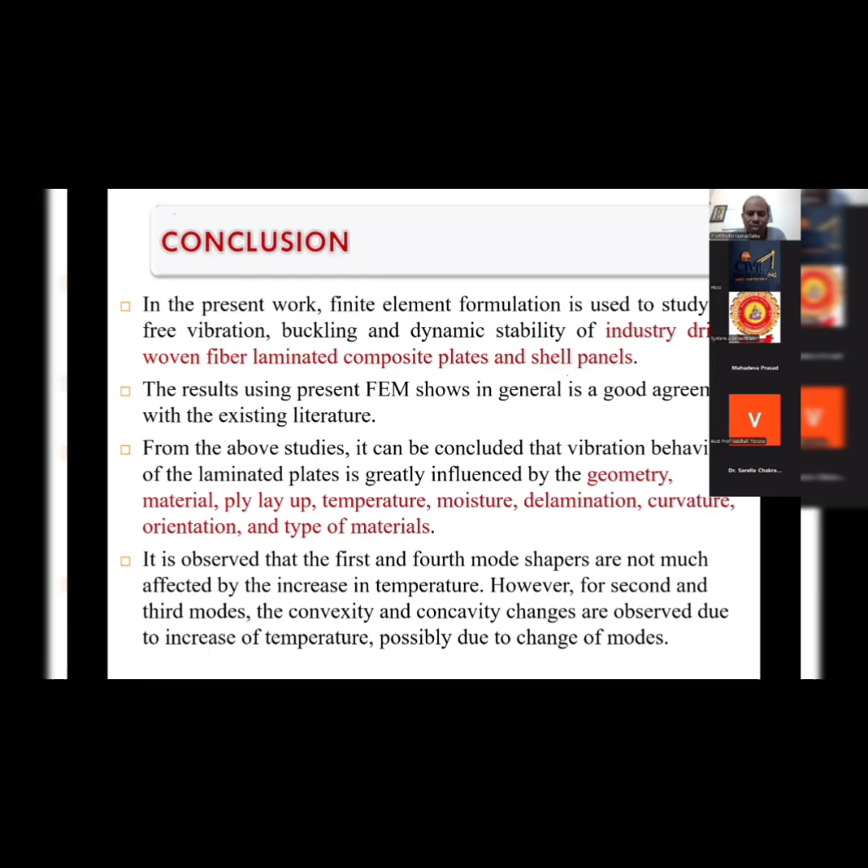From the above studies, it can be concluded that vibration behavior of laminated plates is greatly influenced by geometry, material, ply layup, temperature, moisture, delamination, ply orientation, and type of materials. It is observed that the first and fourth mode shapes are not much affected by the increase of temperature. However, for the second and third modes, changes in convexity and concavity are observed depending on the mode shapes. So the designer has to be cautious while dealing with structures subjected to dynamic loading.

Composites have the greatest advantage of tailoring. This means, if it is subjected to tensile load, you choose one orientation; if subjected to compression, another orientation; or if subjected to torque, a different one. So what kind of orientation will be feasible? All orientations are feasible—whichever shows higher strength is what is used.

That's called tailoring. The vibration results can be used as design aids for the dynamic design of composite structures. The modal test results can be used as a tool for structural health monitoring of structures, including location of damage in composites. We have also done composites with cutouts, of different sizes, as well.

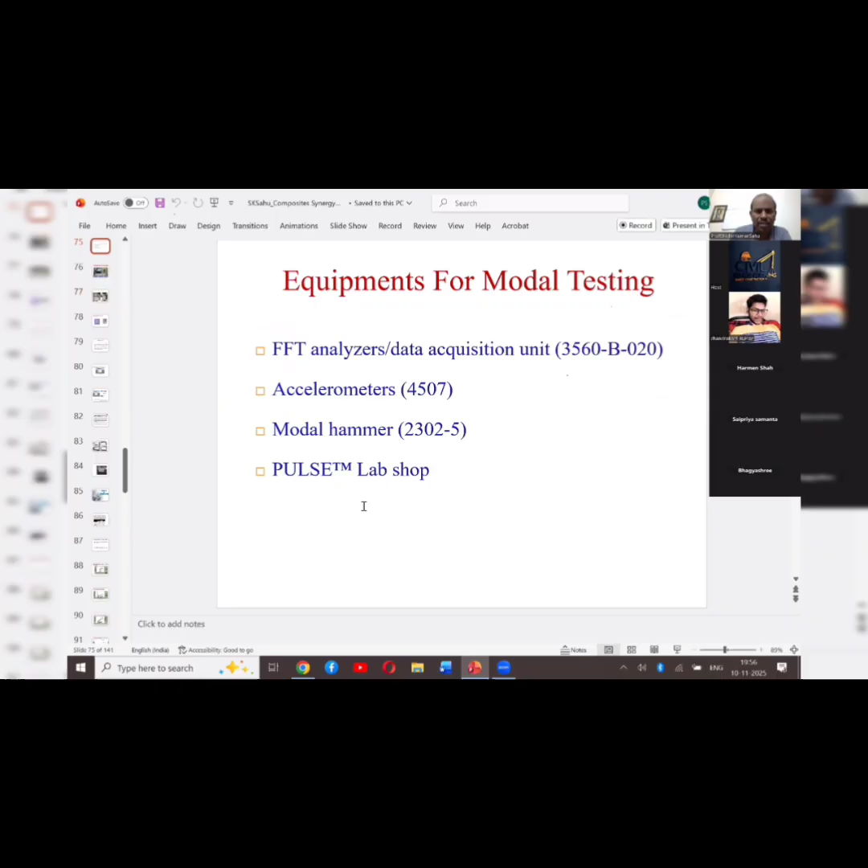That's your tailoring. So if you want, like we do not use normal concrete, we add silica fume in the matrix. We have added nano silica, nano alumina, which has increased its strength. Now we have added carbon nanotube, you can add carbon nanotube to increase its strength. And there is a material you might have heard of, graphene. Graphene, if you add it, it also adds to your strength.

These materials can be added to the matrix for increased strength, because these days materials like metal organic frameworks are also getting employed, and naturally some biochar conventional composite has been done as well.

For the automotive industry, I think plant fibers are beneficial, or we have to move to carbon fiber material, then carbon and glass fiber. Plant fibers are taking small loads. These are good, but the load capacity is small.

Okay, so thank you so much, Professor. Sorry to interrupt, sir. We have another session which will start right at 8 p.m. So sir, anybody interested can communicate with you later. Sir, with your kind permission, can we stop this session? Sure, I am quitting.

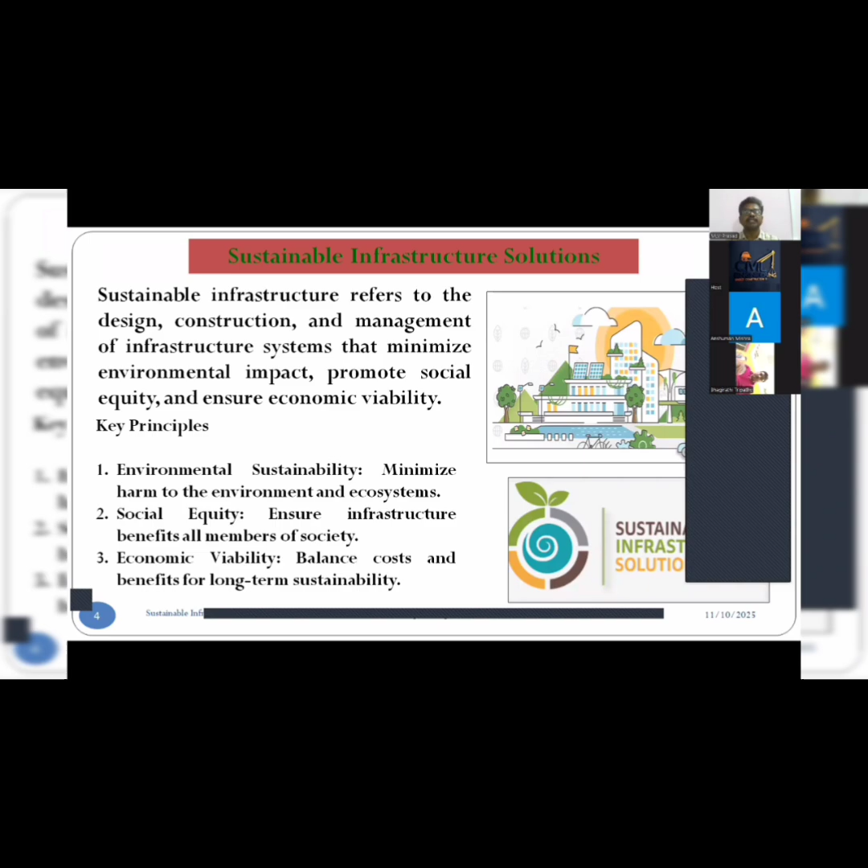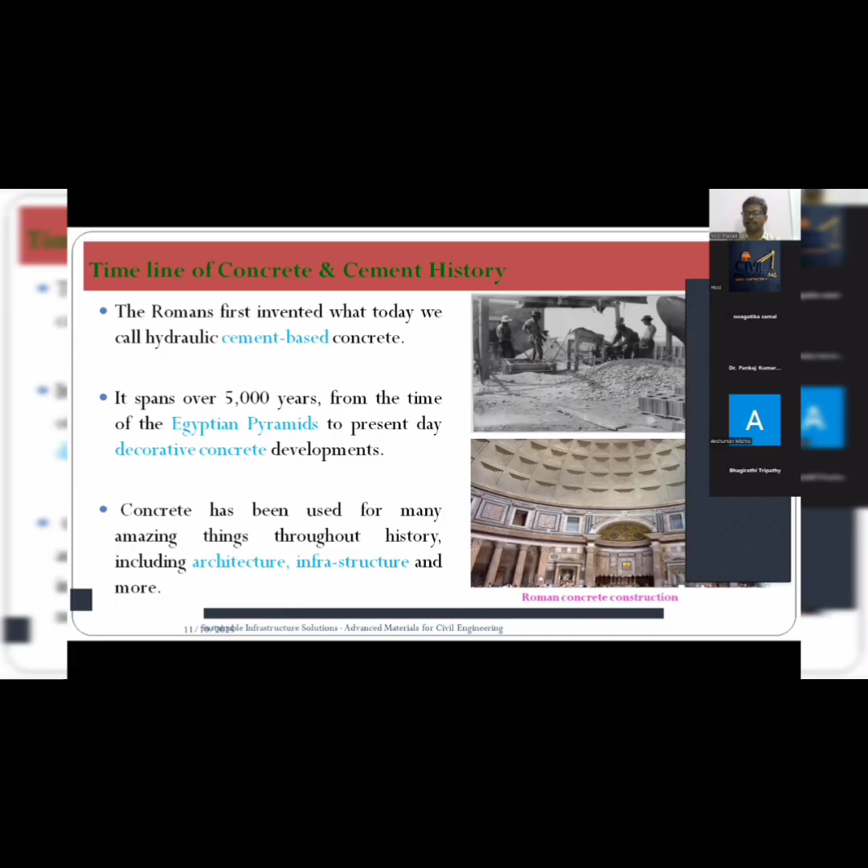you will achieve the target strength only with respect to compaction. Compaction and curing, these two things are very much required because it should be compacted thoroughly and it should be cured thoroughly, then only you are getting it. And whenever I say concrete, it should have some workability because it should occupy all the spaces in the infrastructure. So concrete means it should have the workability, it should have compactability, it should be cured properly, because in all cement based concretes, with respect to the hydration process only, you are going to get the strength. So we have to think that whatever concretes you are developing, it should have workability, it should be compacted properly, and it should be cured properly. So many things are involved, so it is going to be costlier.

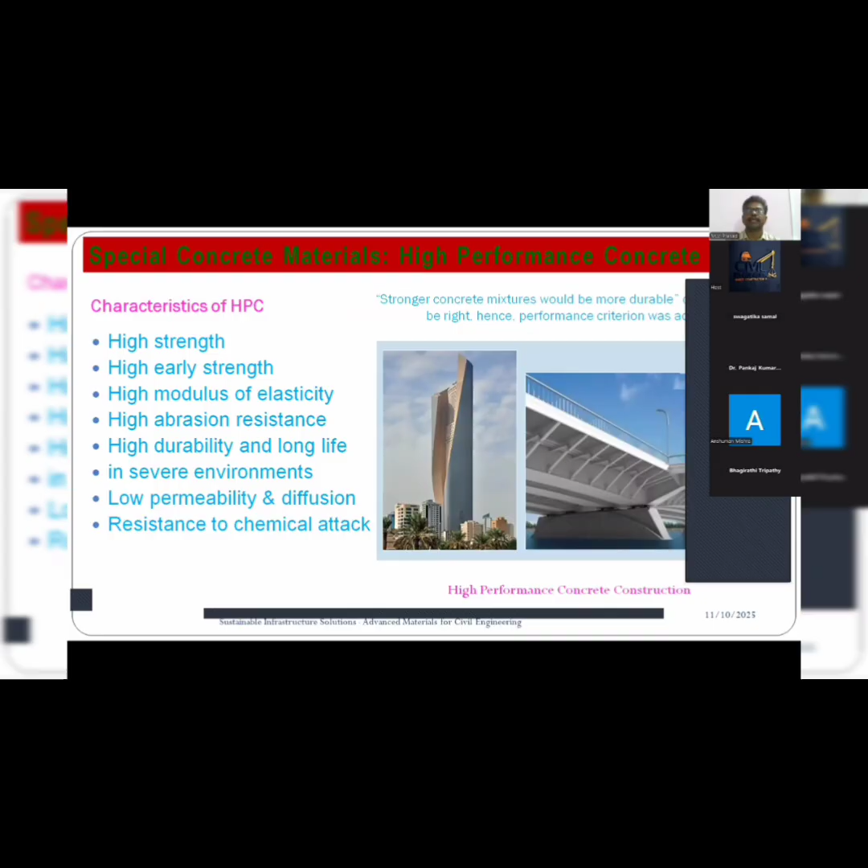Right, thank you. So in this process, when you are preparing special concretes, you should keep in mind that it should not only have special properties, it should be environmentally friendly. And environmentally friendly, and at the same time, if it is locally available, then it is good because it should be economical also. I can propose many environmentally friendly solutions, but if they are not available locally, then it is not a good solution. You give an environmentally friendly solution, but at the same time you try to utilize locally available materials like ashes. Suppose you take fly ash, in India plenty of fly ash is there. Suppose you don't have fly ash, then other slags are there, metakaolin is there, silica fume is there. You use that, you replace, because when you are replacing this, you are going to get the solution in two ways. One is you are giving a solution to the waste, because it is a byproduct from industry. And another way, you are improving the strength properties by using materials that are environmentally friendly and locally available. That is the main concept.

So we already discussed regular normal vibrated concrete. We are not satisfied, because if I want to construct a G plus 50 building, you are going to get a cross section of 2 meter by 2 meter or 1 meter by 1 meter, like that. So instead of that, we have to go for high strength concrete. In case of high strength concrete, you are going to get slender columns and slender sizes, so the cross section is going to be very small. By that, you are able to achieve the high strength, but it is not going to give you ductility. When you test this, during earthquakes or failure time, the structure is going to have a sudden failure. Sudden failures are not at all recommended in our infrastructure, because if it is a sudden failure, then the loss to human beings or loss to infrastructure is going to be very high. So we don't want any sudden failure. We want sufficient ductility in the concrete, and that is how we will develop it.

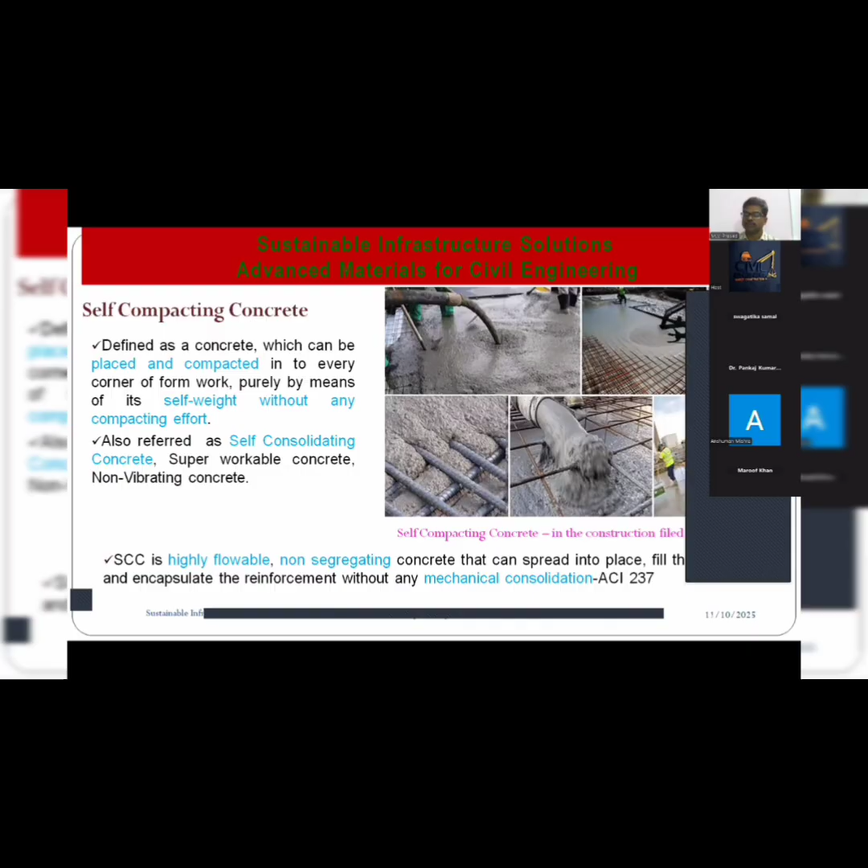So here, no need of any external vibration, because in some sides it is not possible to compact, and sometimes there is no chance to compact. In that case we will go for this self-compacting concrete.

Already we have seen that two major criteria are it should be compacted thoroughly and it should be cured thoroughly. This creates a problem. So instead of going only for compaction, we can also go for curing - even no need to cure the concrete. That is called self-curing concrete.

There are two types: internal curing agents and external curing agents. If you add these in the concrete along with self-compaction, no need of curing also. Nowadays these have come into practicality - recently some L&T works I have visited are using these self-curing agents, because in some places curing is not that easy.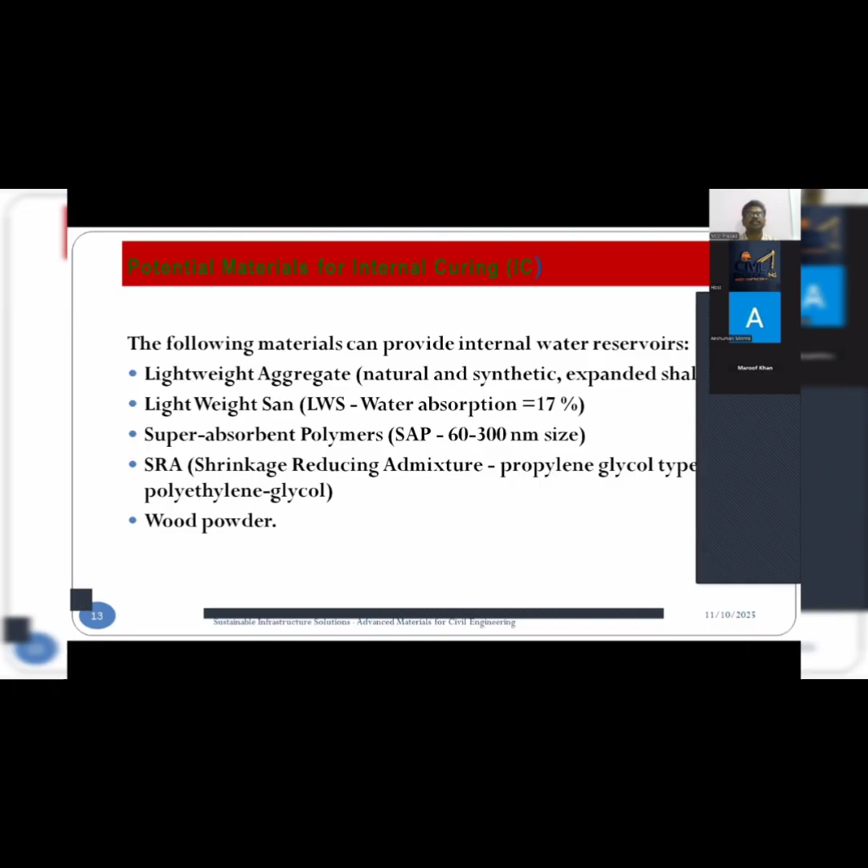Even you will not get drinking water in some places, and there proper curing is not possible. That's why we use self-curing agents like lightweight aggregates, super absorbent polymers, shrinkage reducing admixtures, wood powder - they come in different forms. Generally, liquid paraffin is there, both high and low types. Based on your requirement, we use sometimes a light one or sometimes a heavy one.

Super absorbent polymers can also be used as internal curing agents. With the advantage of self-curing along with self-compacting, you will achieve all the durability improvements - you can see weight loss, X-ray powder diffraction results, and workability results. If you check all these, it is going to be very good. That's why nowadays it has almost come into practicality.

Maximum companies are simply going to cast specimens, whether it is internal curing agent or external curing agent, and they are going to take the advantage of it.

In all these cases, whatever we have discussed - whether self-compacting, self-curing, high strength, high performance, vibrated or environmentally friendly - all these things are there. But the thing is, whatever you are saying, you are not able to completely avoid the cement.

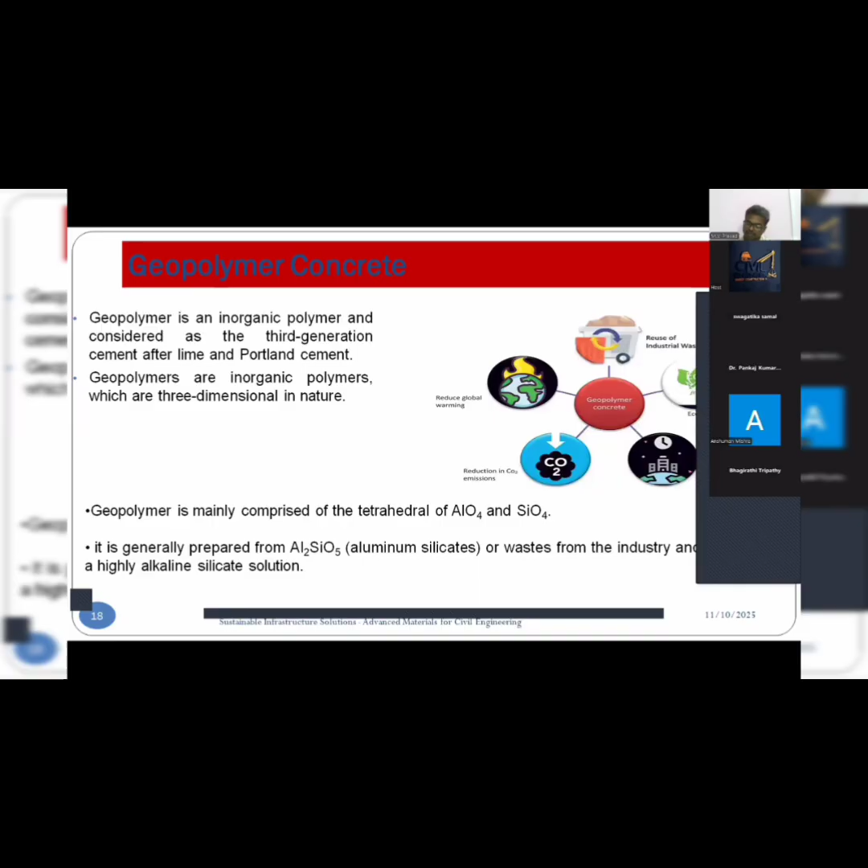This is mainly comprised of tetrahedrals of AlO4 and SiO4 - alumina silicates, alumina and silica. With these AlO4 and SiO4 combinations, aluminosilicates, we are going to prepare the alkaline solution. For the preparation of alkaline solution, you can use sodium hydroxide or sodium silicate. So we are going to have the alkaline solution, and we are going to have the binder.

So these two things are going to be mixed to develop the geopolymerization process, and that is going to give you here no cement hydration, simply geopolymerization. This alkaline solution is going to react with the silica content available in these binders, and through the process of geopolymerization you get polymeric action, inorganic polymeric action. That's why we are calling this geopolymer concrete.

But when you are going for this, you should be careful - you have to use the gloves and all that, and you have to prepare the concrete. It is a very good alternative. Already I told you, whenever you are going to say about geopolymer concrete, you use the locally available materials, and use even sodium silicate also. Nowadays from some industries it is coming as a byproduct.

Directly if you purchase these chemicals, they are going to be costlier. Instead of that, if you use some industrial waste - sodium silicate and all these things are also available as industrial waste - if you use these, then the cost is going to be very less. Nowadays in India, fly ash is very cheap, and you can develop the geopolymer concrete only by using fly ash, or you can develop it by using fly ash plus GGBS and all that.

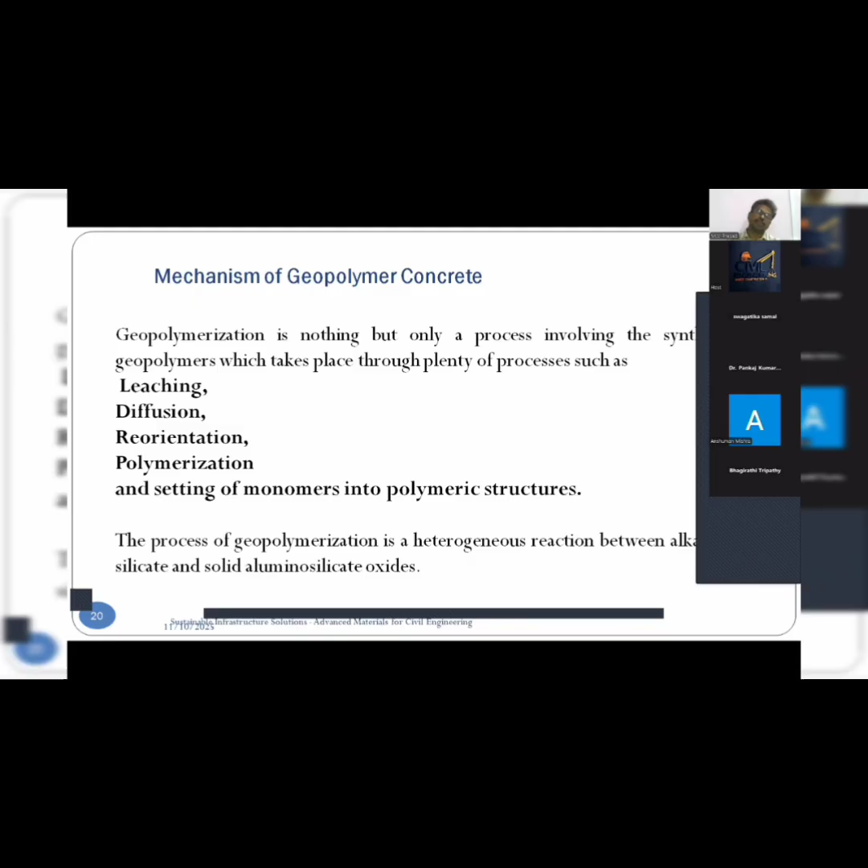So for these alkaline silicates and sodium alumino silicate - that means sodium hydroxide or potassium hydroxide, any hydroxide and any silicate - this is going to be combined with the binders. From that you are going to get the geopolymer concrete. But the thing is, when you are going to prepare this...

Preparing the concrete, already I told you, these have some superior properties - it sets at room temperature. That means no need of any external curing. Pani jaruri nahi hai - you don't want any water for curing. Simply at ambient curing only you can do it. But it depends upon whether it is ambient curing or elevated curing, and that depends upon what type of binder you are using.

That we will discuss. It is non-toxic and bleed free - that means there is no bleeding chance, because whatever chemical you are using now, it is going to properly react with the binders, no leakage like in cement mortar. It has long working life before setting - workability is going to be workable for a much longer time, and it is impermeable. Geopolymer concretes are going to have very strong impermeability and high resistance to heat, and resist all inorganic solvents, with higher compressive strength. They are going to have a very high compressive strength.

But there are certain limitations, because already I told you, when I am going to use only fly ash, you have to be careful, because fly ash is not going to activate without any heat. So that's why even though some hydroxides and silicates are there, without initial heat, fly ash is not going to be activated.

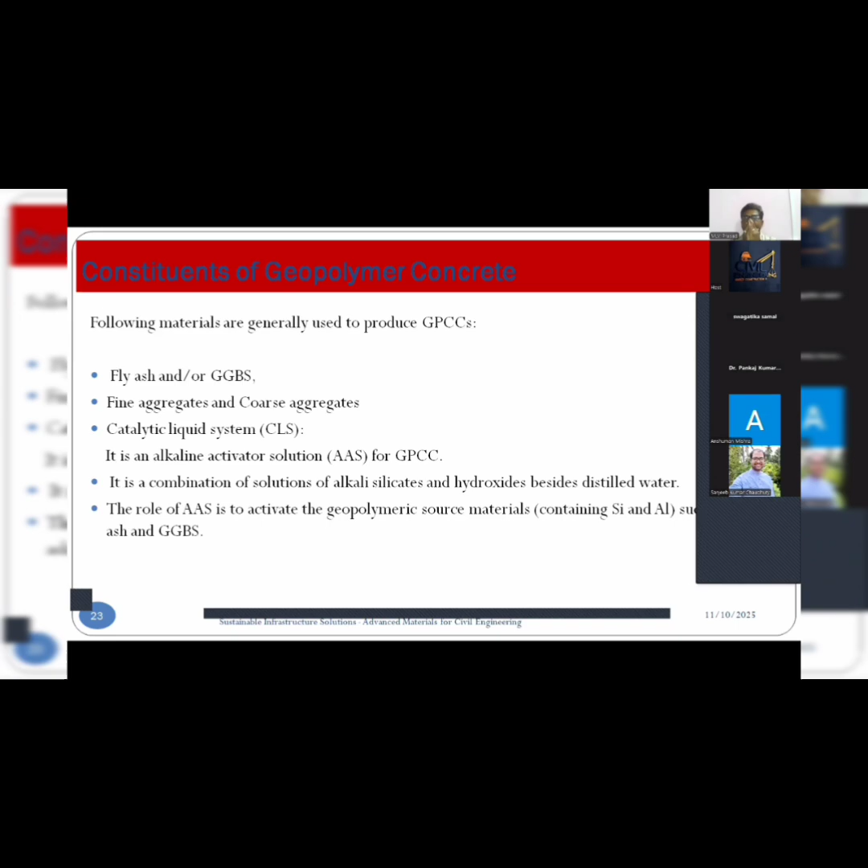Similarly, we can use fine aggregates and coarse aggregate all these things. We have a patent related to this fly ash based preheating technique, instead of post heating, because post heating means the total structure has to be heated, which is not possible on site, it is limited to prefabricated structures. So instead, we developed this preheating technique, and we have a patent for it. After that, we developed one more technique.

Instead of only fly ash, you use a combination of fly ash plus slag, ground granulated blast furnace slag. This gives you ambient curing only, and the strength is also very high. But GGBS alone is not suitable, that's why a combination of fly ash and GGBS is always good for developing it.

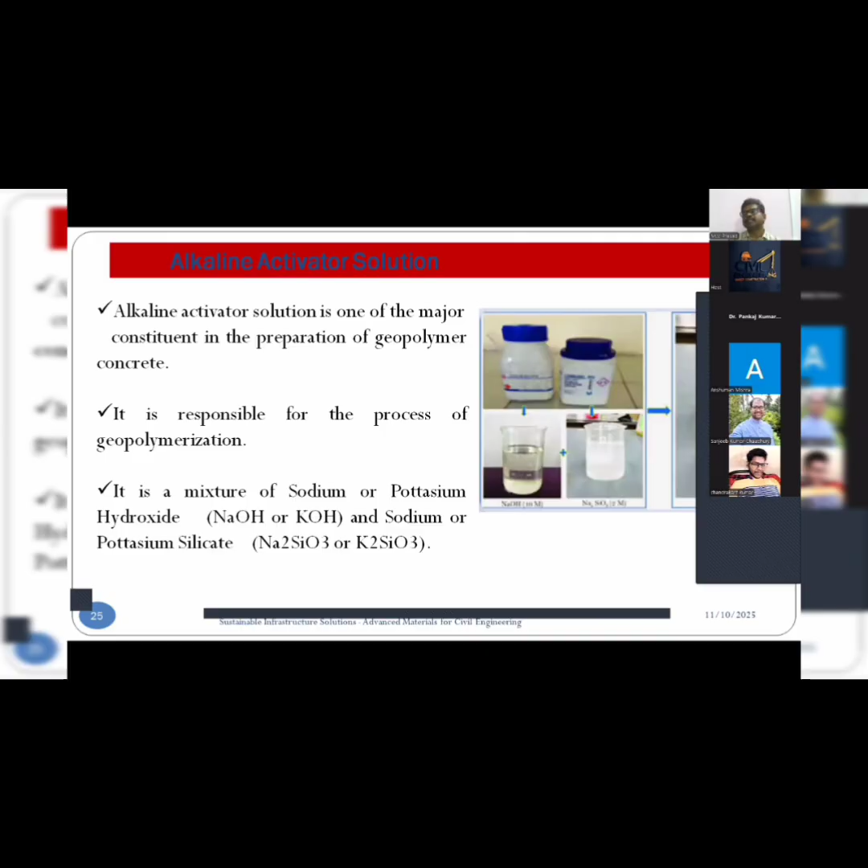This is the preparation of alkaline solution. You can get sodium hydroxide or sodium silicate, sodium hydroxide may be in pellet form, sodium silicate may be in powder form. You dissolve them in water to prepare the solution and add them to prepare the alkaline solution. Otherwise, nowadays from some factories you directly get this as a byproduct, which is much cheaper to prepare.

One important thing here, molarity is very important when talking about geopolymer concrete. One example: suppose I am using NaOH, its molar mass is 40 grams, and if I am taking 1 liter, if I dissolve 40 grams it will give 1 molar. Similarly, for 10 molar, 10 into 40 equals 400 grams of sodium hydroxide dissolved in 1 liter of water, finally getting 1 liter of solution by dissolving 400 grams, giving 10 molar.

Different molarities are there, based on requirement we use from 6 molar to 14 molar. Generally, as molarity increases, strength increases, but the problem is with workability, it will not harden early. If you go for 14 or 16 molar, it will take so much time to harden and come out of the fresh state. So even though higher molarity gives good strength, we prefer only 10 to 12 molar, after that we will not use higher.

These are the different methods of curing. As I told you, if you use a combination of fly ash and GGBS, you can go for ambient curing itself. But if you are not using fly ash and GGBS is not available locally, you can go with fly ash only, but then you have to use preheating or post heating.

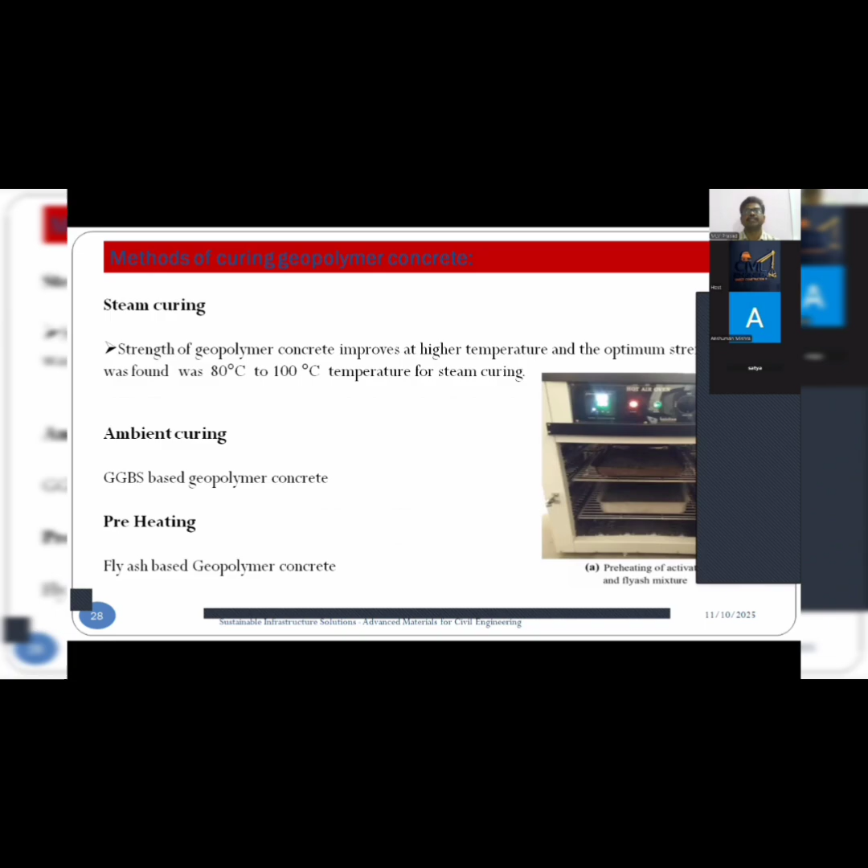So already I told you steam curing is there, ambient curing is there, preheating is there. In steam curing, instead of using preheating, only fly ash is used in preparing the concrete. Then definitely you have to go for elevated temperature steam curing, then only you will develop the geopolymer concrete. And you have developed all these concretes with respect to the concept of sustainability.

Once again, I am telling you, in olden days, even though they developed the infrastructure, they went for different monumental structures. Even after 400, 500 years, they are still giving service, but they are not harmful to the environment.

But nowadays, in the name of early completion, we want a house completed within 3-4 months. If you construct like that, you are definitely going to face problems. And for that, whatever materials you are using are harmful to the environment. So whatever techniques or materials you use, they should be environmentally friendly.

So now we will see some of the techniques that are there. Earlier, only earthen houses were constructed. They are very much environmentally friendly because you are not disturbing anything, simply using the locally available earth, and adding some locally available things to prepare this mud as a binder, as a wall, as a construction element. And the floor and roof also use waste coming from agriculture. So it is definitely environmentally friendly and sustainable.

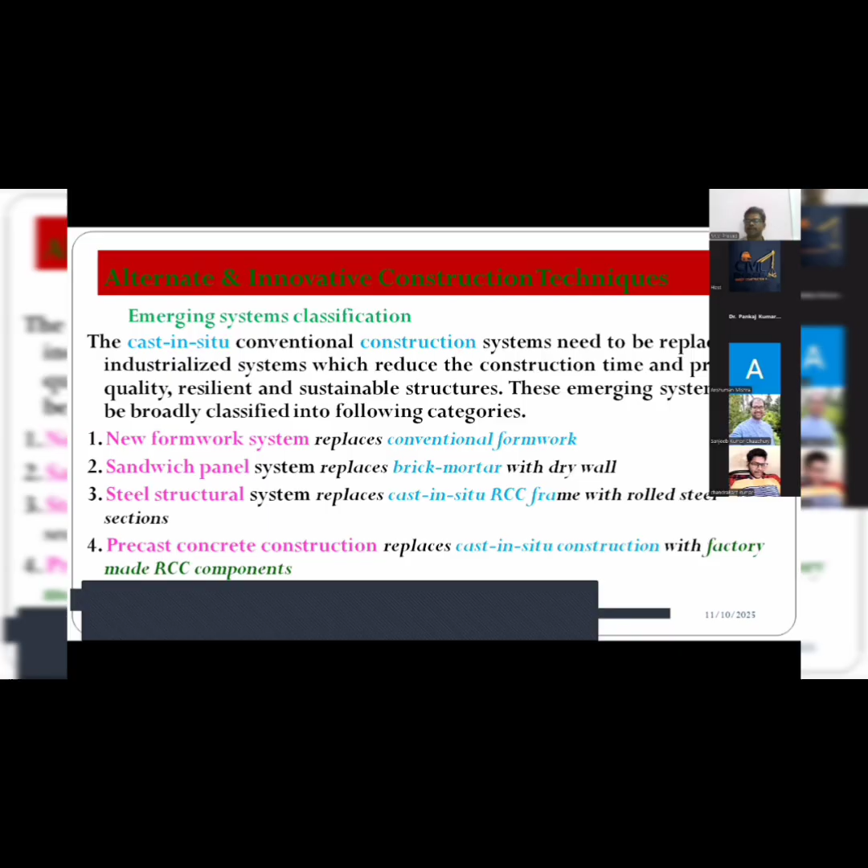Instead of cast in situ RCC, you can go for a steel frame because it is readily available. Like that, even precast is also one of the solutions.

Nowadays, all these are precasted walls, precasted doors, precasted windows. Even the staircase is now available precast, and you have all these ready, and you assemble them into a single property. So you use this precast construction technique.

And after that, we are going to have basically this precast construction for low cost housing, completely taking from the partition walls to roof to doors, windows - everything can be prepared.

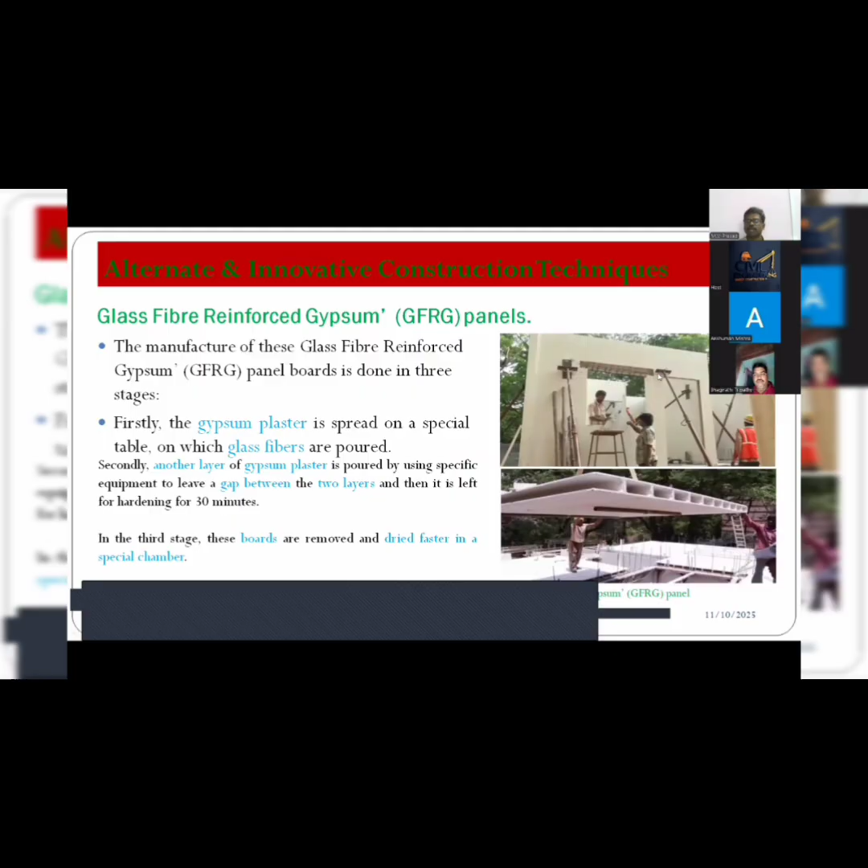IIT Chennai has prepared GFRG panels. Directly these panels can be used - see here, this is used as a slab. Similarly, this can be used as a wall. It is used like that, and you can even prepare the staircases also. So like that, you have to develop.

And now after precast concreting - precast also has certain limitations - nowadays we are thinking of 3D printed concrete. This is the latest technique.

Whatever the advancements are there in the material and whatever the advancements are there in the techniques, we are going to combine both of these and develop 3D printed concrete.

I am going to have one more session tomorrow. In that, I will explain in detail the advantage of 3D printing concrete, how to prepare it. The main problem with 3D printing is the additive you are going to use - the mortar you use is very costly.

Instead of that, you are able to develop that additive yourself in your laboratory. Then you are able to develop whatever robotics and software is there to prepare this 3D printing technology in 3 dimensions - X, Y, and Z. You have to know the programming and all that. If you develop all these indigenously, that means we develop all that in our college itself, then it is going to be automatically economical. Much more about this we will discuss tomorrow.

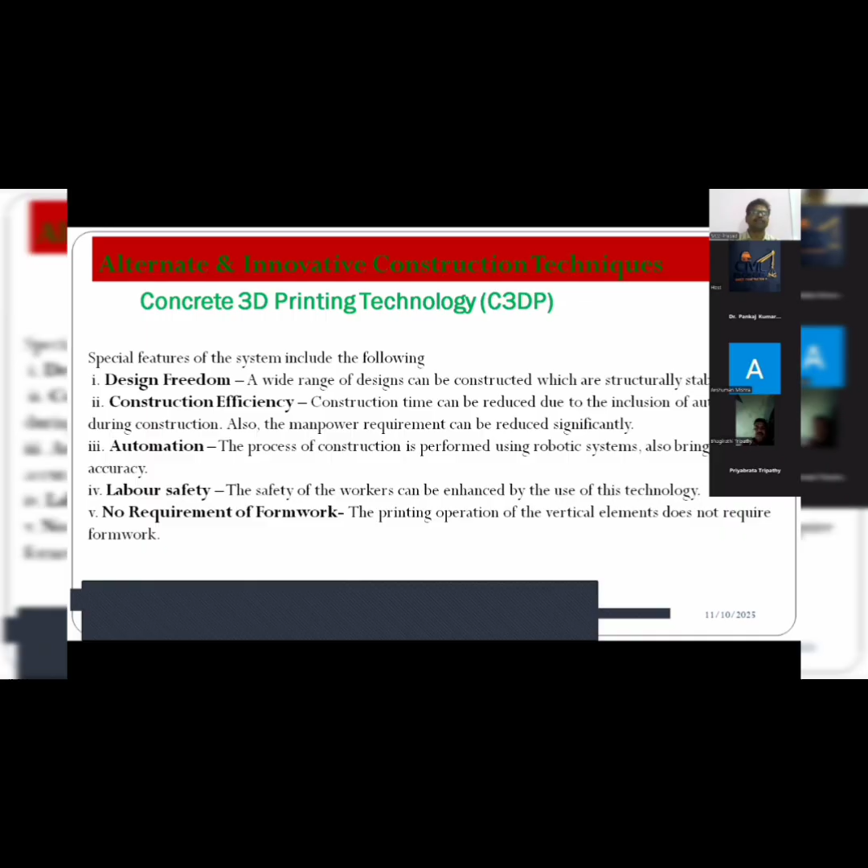And automation - because once you have prepared one model and say this is passed, then any number it will prepare within no time, with very less time you can get more numbers. There is no need of any formwork, and it is going to be very safe for the laborers.

And another alternative technique we are proposing is composite multi-story structure.

What we are suggesting is that whatever developed geopolymer concrete or other sustainable concrete is there, you use as a framed structure. Then the staircases, partition walls, and similar elements can use bamboo-based or other locally available materials. The problem with bamboo construction is that bamboo is biodegradable. Nowadays we have boron coating to improve its life, but it's not as durable as concrete, so after 10-15 years we have to replace it. The main structure you cannot replace, so you go for geopolymer concrete or other environmentally friendly concretes there, while partitions like floor, walls, roof, windows and door frames are prepared with bamboo or other locally available materials, making it environmentally friendly and economical.